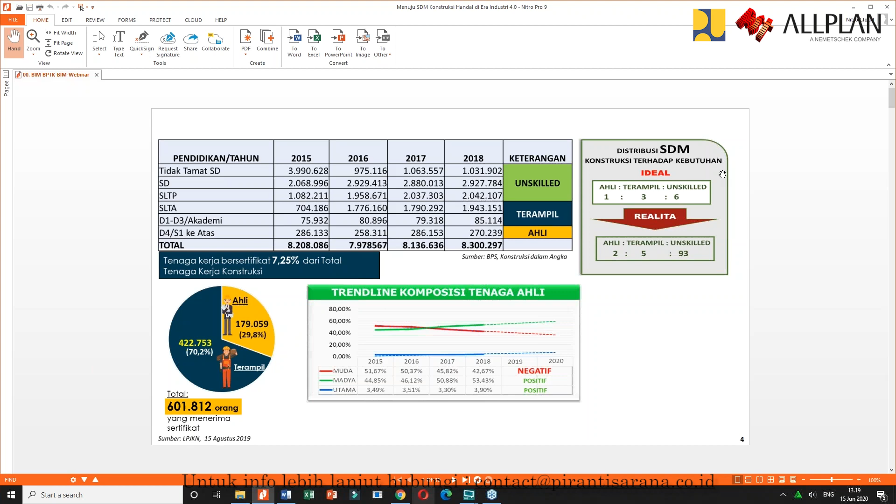Kami ucapkan terima kasih. Ini adalah pertama kali kita melakukan webinar bersama antara Balai Penerapan Teknologi Konstruksi, Direktorat Jenderal Bina Konstruksi bersama Allplan. Allplan ini adalah salah satu provider dari BIM yang berasal dari Jerman, setahu saya demikian, yang tentunya banyak sekali hal-hal yang akan kita dapatkan dalam webinar ini.

Pak Siswanto, Mr. Ulrich, dan Bapak Ibu sekalian, saya akan membawakan bahan presentasi atau pengantar tentang capacity building teknologi perancangan menggunakan BIM untuk mendukung konstruksi digital.

Mungkin ada beberapa dari Bapak Ibu yang sudah mengenal bahan ini, tapi tentunya kami harus sampaikan berkali-kali supaya kita memiliki visi yang sama terkait bagaimana teknologi informasi ini, terutama BIM, dapat diimplementasikan di Indonesia.

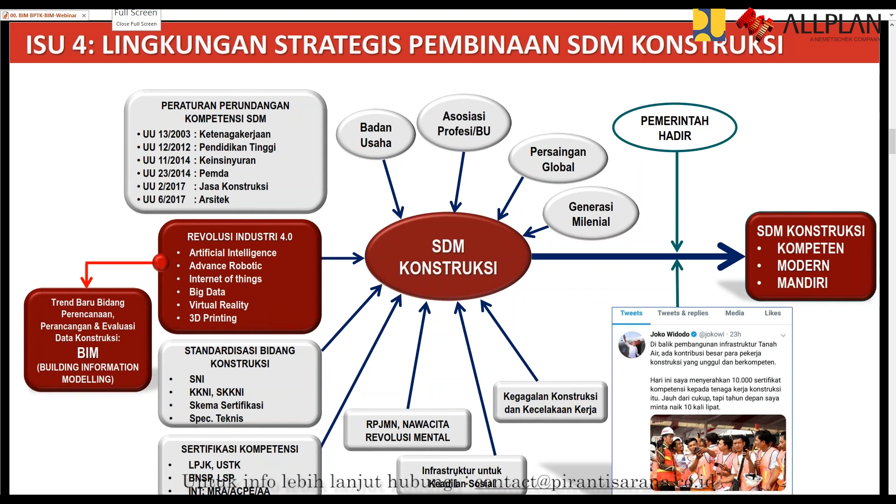Dalam menghadapi revolusi industri, ada 3 hal yang dilakukan oleh Kementerian PUPR, Direktorat Jenderal Bina Konstruksi. Pertama, kita melakukan distance learning di Bina Konstruksi untuk menjamin tenaga konstruksi memiliki pengetahuan dasar sesuai SKKNI, Standar Kompetensi Kerja Nasional Indonesia - ini adalah lower strategi. Kemudian BIM Capacity Building sebagai upper strategi, dan upper strategi lainnya adalah magang di bidang konstruksi.

Hari ini kita membahas tentang BIM. Mengapa BIM diperlukan? Ada historis di masa lalu Indonesia bahwa data-data kurang terdokumentasi dengan baik, proyek-proyek kurang terintegrasi sesama proyek, dan para tenaga ahli sering terjadi dispute. Itu menyebabkan inefisiensi dan inefektivitas. Tantangan ke depan adalah pekerjaan kompleks, visualisasi dari dokumen kerja diperlukan, dan kita memerlukan low cost dan tepat sasaran. Maka itu kita memerlukan BIM.

Kalau kita lihat definisi BIM, BIM adalah metode, bukan software. BIM merupakan metode kita melakukan integrasi data. Data-data diintegrasi, kemudian terjadi kolaborasi antar tenaga ahli dan antar data. Data-data itu hidup, tidak mati, sehingga dengan demikian kita melakukan visualisasi dengan BIM.

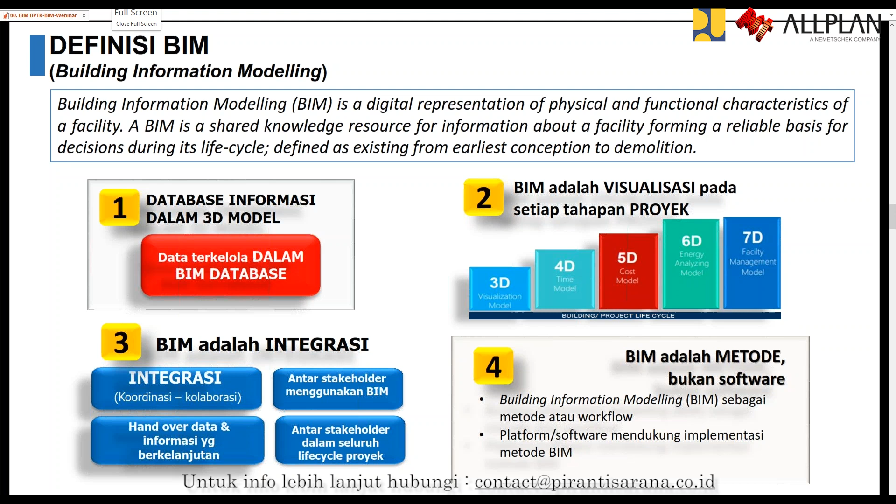Visualisasi yang kita lakukan bisa berupa 3 dimensi sampai 7 dimensi. 3 dimensi artinya panjang kali lebar kali tinggi. Dimensi keempat adalah scheduling. Dimensi kelima adalah volume atau quantity. Dimensi keenam adalah energi. Dimensi ketujuh adalah operation and maintenance.

Ini adalah arahan dari Menteri PUPR bahwa ke depan untuk melakukan terobosan dalam pembangunan diperlukan banyak hal. Ada 5 hal yang menjadi titik concern pimpinan kita, 2 di antaranya yaitu sumber daya manusia dan penerapan hasil riset dan teknologi.

Bapak Ibu, kalau kita lihat regulasi berdasarkan peraturan Menteri PUPR nomor 22 tahun 2018, di situ disebutkan bahwa pemerintah saat ini memiliki regulasi yang ketat terkait dengan bangunan gedung. Bangunan gedung untuk di atas 2 lantai dan di atas 2000 meter persegi wajib menggunakan BIM.

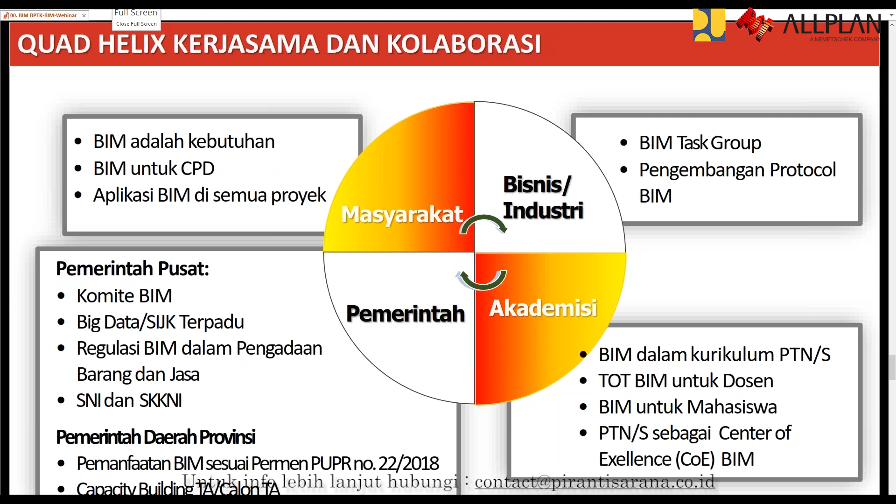Silakan, baik Pak, terima kasih Bapak Kepala Balai Penerapan Teknologi Konstruksi, Pak Cakra Negara, atas sambutan sekaligus pembukaan dan pemberian pencerahannya tentang pemimpinan BIM di Indonesia.

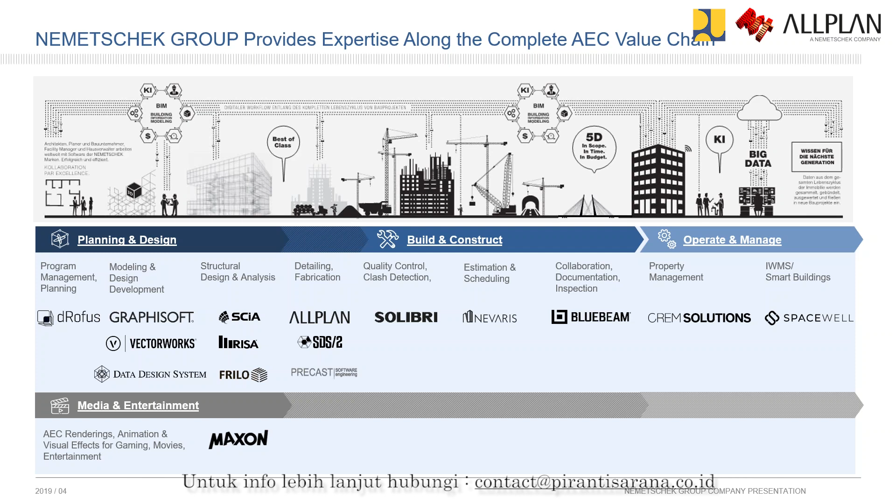Today's webinar is all about Allplan, more specifically Allplan Engineering. Let's start with some figures about Allplan itself. Headquarters of Allplan are in Munich, Germany, and we have offices in Austria, Switzerland, France, Spain, Italy, the Czech Republic, Slovakia, the UK, and the USA. Allplan employs more than 400 people in those countries.

240,000 users use Allplan on a daily basis, and we work closely together with 23 strong technology partners in 12 different countries.

Allplan comes in a few different flavors: Allplan Architecture, Allplan Engineering, Allplan Bridge, and Planbar for Precast. BIM Plus is the data hub in between that connects all those flavors with the other Nemetschek brands and even third-party software. More about BIM Plus will be in the webinar on Wednesday.

Let me shortly explain the different flavors before we go to the software itself. Allplan Architecture is a focused BIM tool for architects that comes with extensive CAD functionality. You can work in 2D and 3D simultaneously, and it creates efficient and quality construction drawings as well as high quality and reliable quantity takeoff. Allplan Architecture offers full render capabilities using the integrated Cinema 4D render engine.

Now about Allplan Engineering, the product we are speaking about today. It's a focused BIM tool for structural and civil engineers. Also here you can work in 2D and 3D simultaneously. It's a BIM tool with extensive CAD functionality capable of creating efficient and quality construction drawings, as well as high quality and reliable quantity takeoffs.

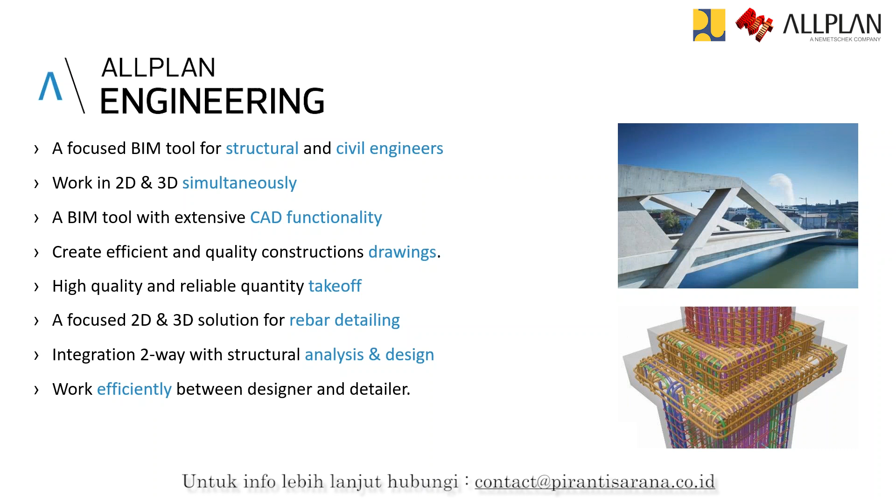The latest addition to the Allplan solution portfolio is Allplan Bridge, the professional BIM solution for bridge construction. Engineers work with a single solution from parametric model creation, with a high level of detail including pre-stressing, to integration of the construction process and structural analysis of the bridge model. Allplan Bridge offers an optimal BIM workflow for bridge construction, a common 4D parametric data model for detailing and analysis, and innovative, BIM compatible global structural analysis.

And there is BIM Plus.

Collaboration lets you visualize and analyze data from the entire project team. You can merge models from multi-disciplinary project teams. It's an open platform for all software. Collaboration is possible using the standard formats IFC and BCF, and it offers powerful API capabilities and can be used on all modern mobile devices.

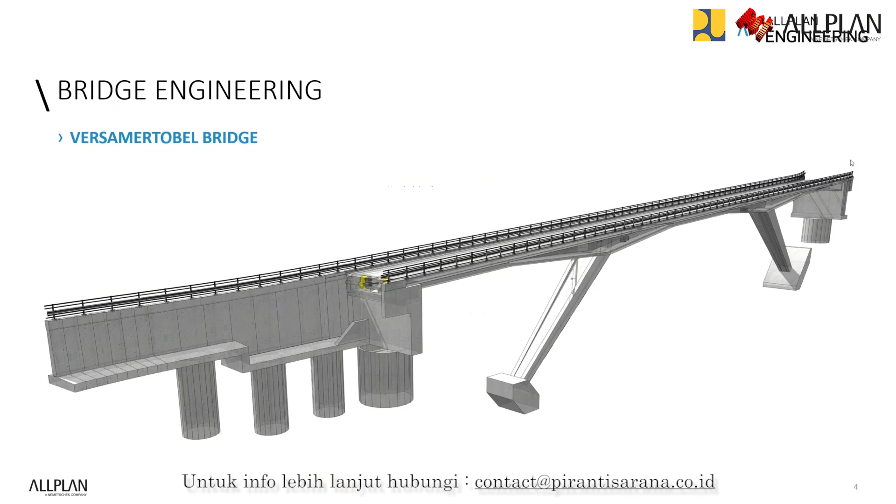First one is the Versamertobel Bridge in Switzerland. It's over a gorge in the mountains, about 150 meters long, and the span between the supports is 80 meters. We'll take a look at the 3D model to see construction phases and also what is inside this model, where you can see the rebar. And then we can also check the rebar stages. We'll also take a look at drawings to see how this can be represented, for example with the Swiss standard.

Next project is the Drydocks in Duqm in Oman. It's part of a large harbor project - these are 2 dry docks, about 400 meters long and 100 meters wide. We'll also see how a massive project like this can be managed, how these individual elements can be reinforced and managed.

Next is the Tamina Bridge, a fairly recent bridge in Switzerland also, and the construction sequence was quite special. I will show you this also in Allplan later, how you can see this or simulate this from the 3D model itself. The total length is about 450 meters, and the main span here is 260 meters. I think the gorge for the river below is also about 250 meters high. We'll take a look here to see in this project also a lot of pre-stressing tendons together with rebar detail.

Then another one is a railway bridge in Belgium. This looks like something very simple, and it's just one cross section. It's not so long, about 100 meters long, and the main span is 35 meters. But I will show what is interesting in this project, because it's a very simple structure but the detailing is very complex - you can see the tendons, and there's also something special with the supports which makes this very complex.

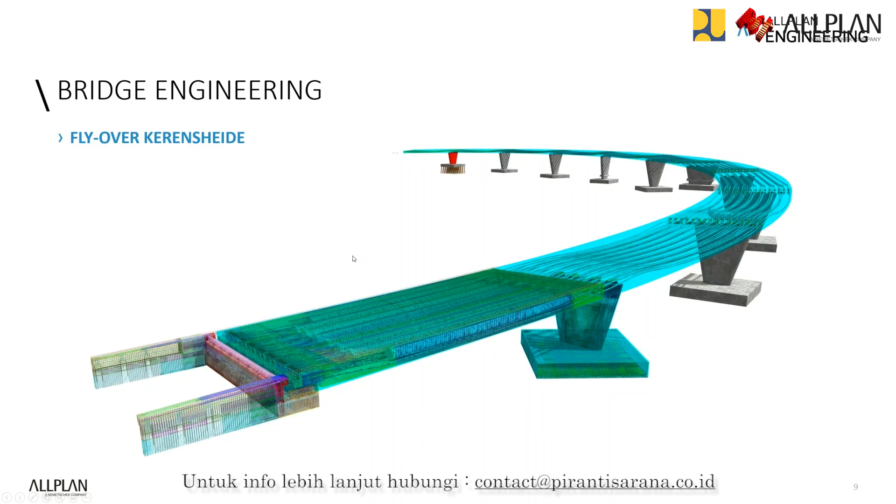Yes, so we start off with Versammeltobel Bridge in Switzerland. We can see also that in Allplan you can have your digital terrain model to see how it fits into the environment. And we can check the 3D model and then see, for example, the detail for these guardrails. We can see at the bottom that we have these tendons. So you get a good overview, or you can imagine how this project would fit in a 3D terrain, for example.

Okay, now I will also show some functionalities for Allplan. In this case, you have this curved road. The bridge itself is straight, but you have functionality to represent this in a good way.

And this is a section along any curve. So you see here actually the road axis, and I can make a section along this road axis, which can be curved. So it can be a circle, straight line, clothoid. So it can be a whole road axis.

And with this function, you can just click the axis, choose the direction that you want to look, and now the model will be cut, or a section will be created along the terrain with a depth of 0 in this case. So you see here, let's make this a little bigger.

So we see here that this terrain, there's a gray line, has been cut along this axis, and you see also all the elements. Now I can also make another section here along these lines.

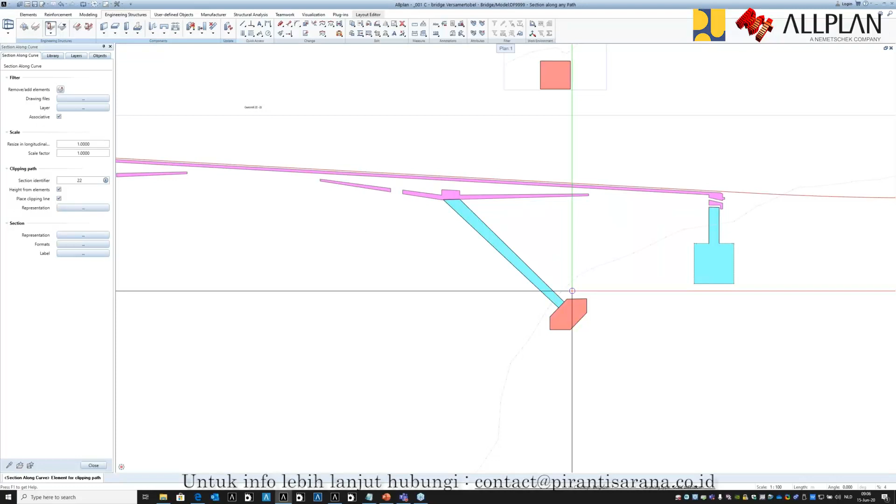Again, you can choose from which side you would like to look, from this side maybe, and then a section will be created just through this line, and this has been taken where you have this support foundation. You can see it now here with the bridge deck and also the terrain.

So it's very easy and very precise to create just a section along any curve and to see all objects, and it will be any object like a terrain, 3D lines, 3D surface. It can come also from other software. If you have a terrain there, you can just import a 3D surface, and then it will also appear on this section.

More with this section, what we can do here is use a dimension, and then you can dimension the section and just place these dimension points, and then you will see exactly the height within the section. So this is like 700 meters high. So you can just click points, and then relative to the absolute elevation, you will get these heights.

Okay, so this is about the section along a curve. Now I will go back to the 3D model, and here we will take a look at some construction stages, maybe not really stages, but to see how this model has been built up.

So you have a specific structure in Allplan where you have divided your project into different files. This will be visible in all of the projects. Sometimes I will go a little bit more into detail about this. So here we have model and rebar, and we also have the terrain.

So let's just say I would like to turn off the terrain here, and then we'll see the bridge and these height lines, for example. You can say, okay, I would like to leave them on, so you can also just turn them off here. And then we get a clean look at what our construction or 3D construction is. So turn off this one here, and then we see the actual bridge construction.

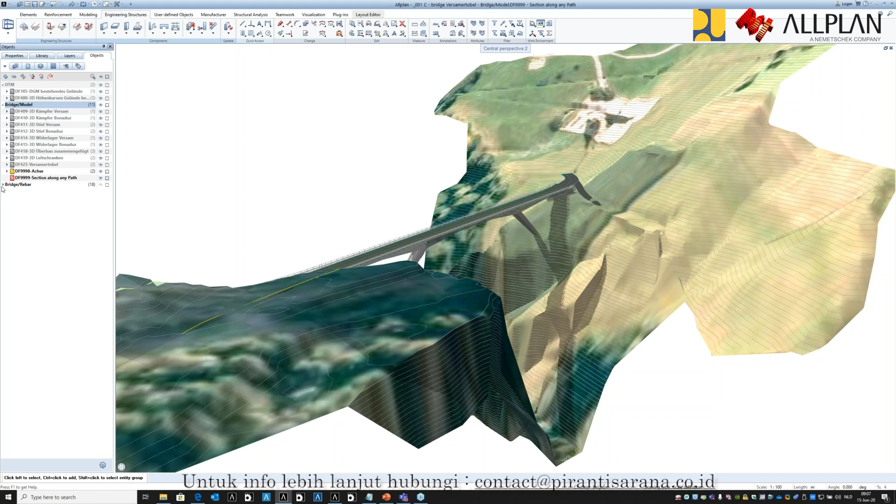So this is all 3D models generated with freeform modeling, and now I can say I would like to build it up from the start to show different phases.

So for example, we have a foundation on this side, we have the foundation on the other side, then the abutments on one side and on the other side. These can be subdivided into smaller parts - it's just here to show the different elements, and this can represent a construction stage. Then we have the main span or main deck, the guardrails, and at the end, the road covering.

Same thing that we can also do for the reinforcement, but it can be done with different detail. So we have here, for example, the rebar for abutments. And then for the abutment itself, we have the foundation for the supports, and then the support.

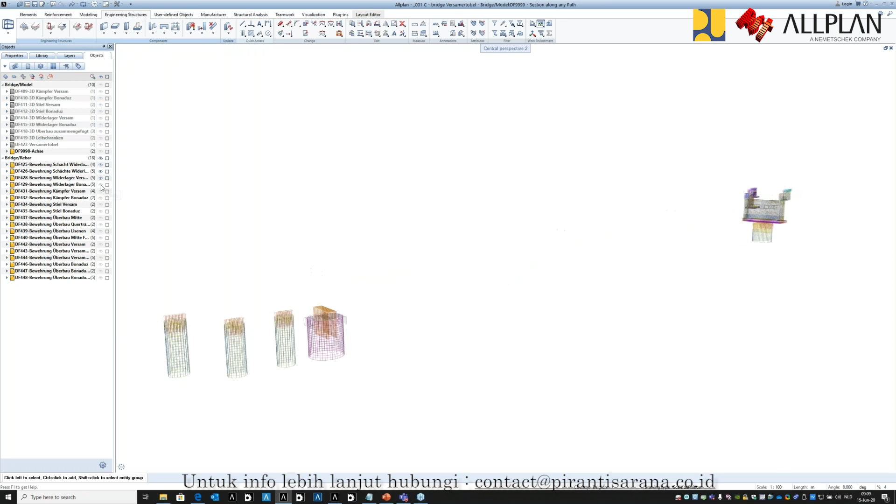So for a visualization, for example, you could choose to show this also with a 3D model. So you have this structure integrated into Allplan, where you can show how it's built up, make some visualizations of it if you want. But this is just part of how you organize your projects.

So we have then the support parts - let's take a look in detail a little bit more. These are all 3D rebar, and from 3D rebar, 2D design will be generated. I will show in the last project exactly what the relation is between 2D and 3D.

Now let's take a look at the main span, for example here, and you can just add and show different parts of each segment to see when the pour should be done or what rebar will be needed for each phase. Let's focus maybe on just one in the middle, so I'll turn off everything here and take a look at the one in the middle.

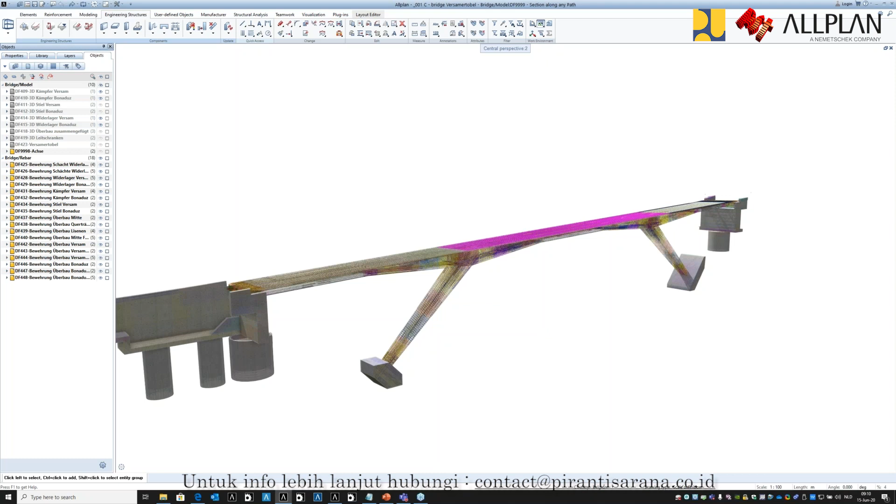So here we have a rebar, with different bar shapes and different mark numbers. In this object tree, we can go into detail about reinforcements - for example, there are 62 different bar marks, and you can say show me where bar mark 1 is. Then you activate it and see, okay, this is bar mark 1. Where is bar mark 2? Something like this - you can go through the project and check in the 3D model where each bar mark is located.

So this gives some overview about how you could organize a project - 3D model together with rebar. Now I will show you the actual plan layout that has been created from the rebar.

So here we see - I can show it in color. This is the design of the middle part that I showed. This is according to Swiss standard, so it can look a little bit different than what you're used to, and you can see details of the rebar with sections. I will also show later how this works, how you can design a bar shape and create a section, and that will be in the last part today.

Another layout is the one about the prestressing - here you can see a detail about prestressing cables. This is something that can be very well created, the tendons with Allplan Bridge, also possible with freeform modeling in Allplan.

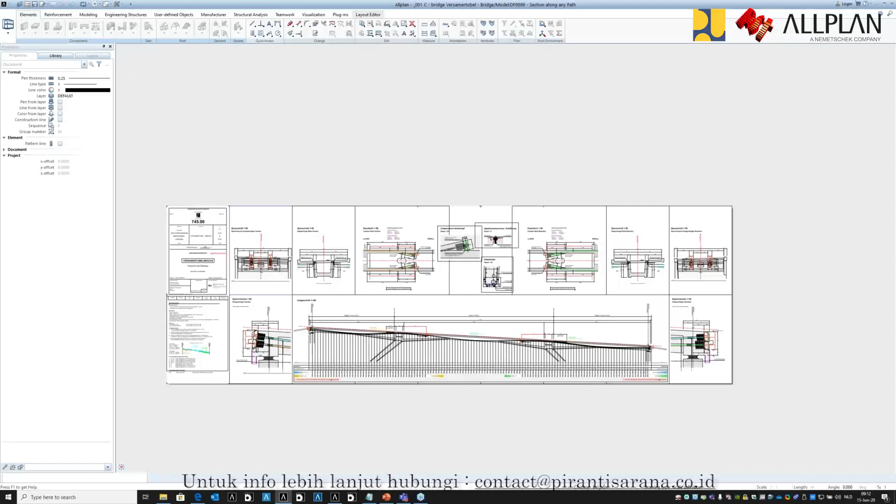In the beginning, the engineering office wanted to just create a calculation of how much reinforcement was needed, but just like a typical sketch or detail, without the need of having actual details created in 3D. But they were the contractor with a very tight construction schedule, so they said let's invest the effort in the beginning so we can actually design all these 3D elements with 3D reinforcement. So when they are poured on the construction yard, we have all the rebar already produced, and we are sure it can fit on the construction yard, and we don't lose time needing to fix problems there, certainly for each of these massive elements.

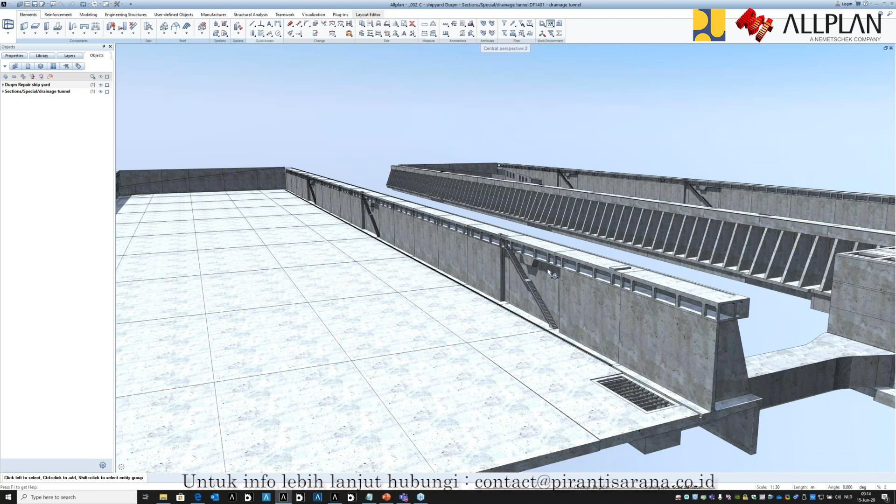Let's check a little bit deeper. If we see here, this is very heavily reinforced. And then we can take a look around, also see where it goes to the pump room, to the other side, so where it actually comes from. This is the entrance, or where the water comes from the Drydock, goes to the pump room. So this is something you also have when you have a 3D model with the reinforcement. You can check the relation and get a better understanding how these things are organized or can fit together.

There will be other elements. Let's take a look at maybe one of these, called sidewalls. So how would you structure a project like this? Because there are many elements and they need to be handled individually. And you would like to be able to work with multiple people because this is a large project. So for this, there is the building structure, and you can organize a project in the way that fits your needs.

So what we see here is an organization, and this is very flexible. You can create this how you would need it or see fit. So we have dock 1. Let's make this a little bit smaller here. So we have dock 1 on this side, and we have dock 2 on the other side.

And this is also how this is organized here. We have dock 1 and dock 2, and then we have corner walls, head walls, side walls. So let's take a look, side wall north, which is this one here. And then you have each of these elements: N1, dock 1, north wall, number 19. So each object is numbered and each object is an individual part of the project.

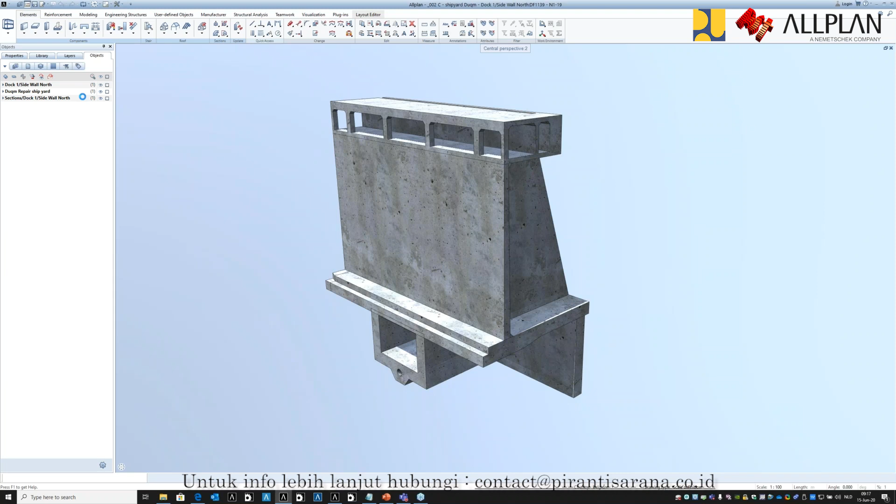In the different colors, each color can represent a diameter or a mark number. So this is up to you, or a reinforcement layer. This is the rebar model here.

So we saw the organization, we saw this drainage tunnel in detail. Let's take a look maybe at the drawing linked from, generated from this model. And this is generated, I think, according to British standard. So let's just take a look at one for the drainage tunnel, one of these sections.

So here we see each label. The label can be customized. For different standards, like we saw the Swiss standard, this is the more British standard. You can configure how these labels should look, and they're linked to the reinforcement. So we have the different sections here for the different parts of this drainage tunnel.

This was the second project. Now let's take a look at the third project, which would be the Tamina Bridge.

Tamina Bridge in Switzerland. This one was about 450 meters long, and the gorge or cliff about 250 meters high. What you will see first is the view of the full model. And you see that this looks quite strange.

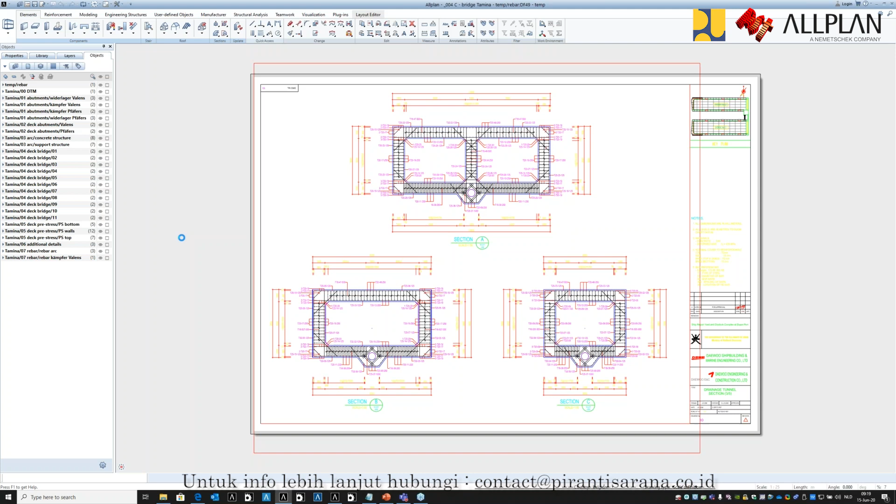This is the purpose, of course. You see that there is some steel construction with cables, but that doesn't really match the bridge. But what we see here is actually different states of the project or the model in one step.

I've activated everything here, so I see multiple disciplines, multiple stages of this project at the same time. Let's maybe focus on the finished bridge like this. So we have a DTM, we have this deep gorge for a river, about 250 meters high I think.

And the construction, on the internet there are very nice pictures about how this bridge has been constructed. Also in the case study, there is something about this. So you see this arc here, how this has been constructed. It's quite impressive because it crosses this gorge, so they need to make the formwork, and actually it's hovering over this gorge just by generating this arc segment.

So first they create a support arc, and then they put the actual bridge on top. Also here I can simulate the workflow. So let's start by turning everything off.

We have, of course, digital terrain, and then here we can see there is some cutouts already for the foundation. We'll just go through here. We have the foundation on this side, and we have the foundation on the other side, and they work on both sides simultaneously. So one group works on this side, the other on this side, and they just construct the first connection, some kind of abutment connection.

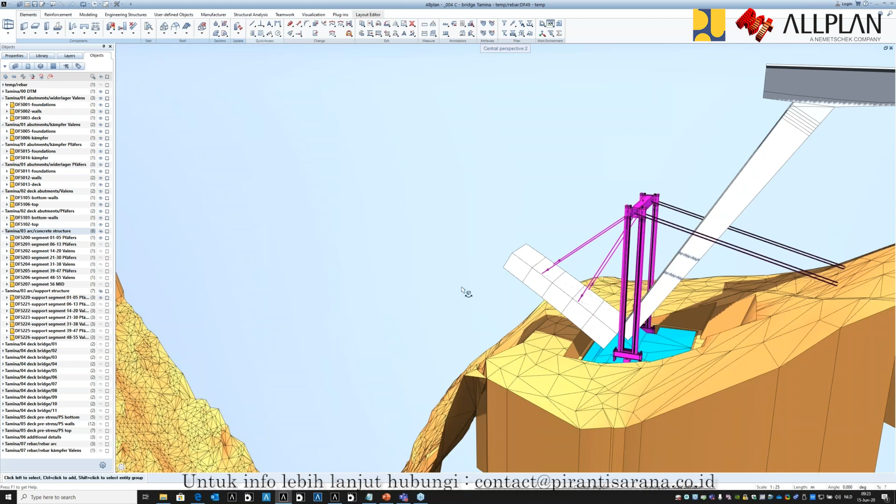So they start on this side, and now they start constructing temporary structure on the other side, and they start with these arcs here. And maybe in this arc, I can show also a little bit of the reinforcement later. So then we go to the next step, actually on this side, and then on the other side, the same thing.

And then here, the last part with the arc. On the other side, also the temporary steel structure. So they have it on two sides, and now by arranging the tension on the cables, they can move it so it can fit perfectly together.

So they still have control to move it like an inch or a little bit, so it's perfectly aligned. And then when that's done, they put the key in the middle, and this structure is completed. The support structure can support itself because it should also support the bridge on top. Then you can just say, don't show the support structure anymore. So this is the actual state of this project at this specific point.

Then we can continue with the deck, and they start in the middle. That seems like the most risk, to start on this arc in the middle without any connection there, but then they put this formwork here - a very impressive construction.

Okay, so first this part is constructed, and then the deck on top. Like this they go through different steps where they first put some temporary formwork, which is then put on top of the arc. So they work more or less in symmetry on each side, and then they have both of these supports. Then they will construct the next part here.

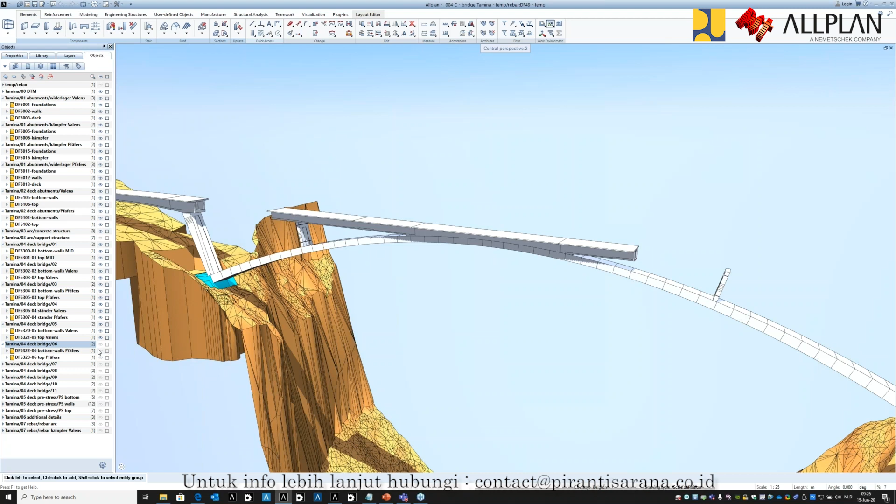The other side is not fully symmetrical because this side is a little bit longer, so it's a very detailed design. There is nothing which is actually the same. The system is the same, but the actual design is different. So there are many variations in thickness of the deck.

This would then be almost the last part there. They start from the support again, so a cantilever, and then they put the middle section. This was finished first, and now in the end, this is the last section here. So now the bridge is complete. Then you put the other elements on top, and now the bridge is complete right now. So this is the exterior.

We see the construction stages and also the parts in the 3D model. Now let's take a look at what is inside, and for this I will put the transparency on. I will turn off the details here. Let me collapse it again, so set the transparency of this surface.

So now we can see a better look in the structure. Some details are highlighted with green for the blisters for the tendons, and for example here the reinforcements - let's check here for this main part. So here you can see now clearly the segments, so check the rebar for this arc.

And we have the first part, which is then the rebars generated or coming from this main foundation, just sticking out because they wait to be connected with all these couplers. So they use a lot of couplers here for each arc - not sure how many, but I think there are more than 1,000 bars in total longitudinal for one segment.

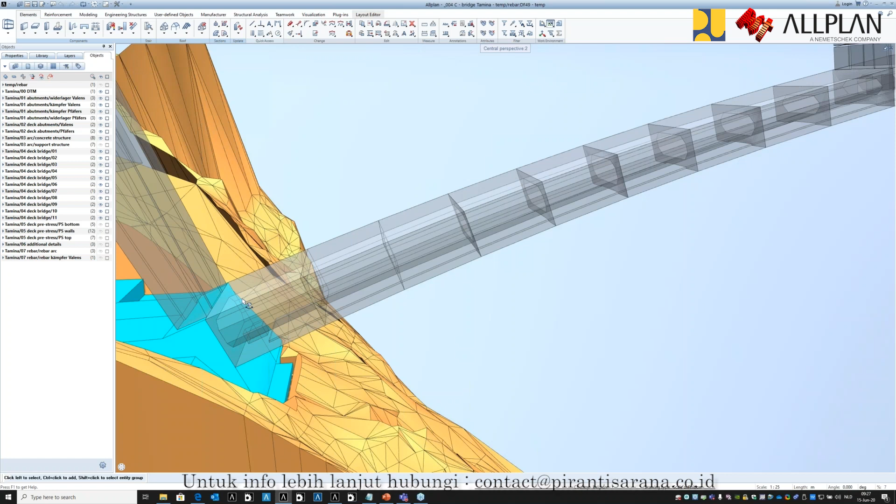And then we have the third part connected like this. So each segment is done with this kind of solution, within this 3D arc structure. So that's how they constructed segment by segment with the rebar - this is also what is seen here in this picture in the case study.

Okay, now let's put on some more reinforcement here, like this - and this is then the rebar around this connection with the support. So there is a lot of rebar in there, which is also a very complex shape. Take a look here. So this is also where the tendons will connect - tendons in the sidewall, tendons on the top and the bottom.

So for planning purposes, seeing this 3D model with the 3D rebar is very valuable to understand how it needs to be generated.

Now let's take a look at the tendons. There are a lot of tendons, I think about 120 in this deck, and we can just activate them all. So we have here this segment - you see here from the start, and then they continue here from the blister. Some end here, so this is for this structure.

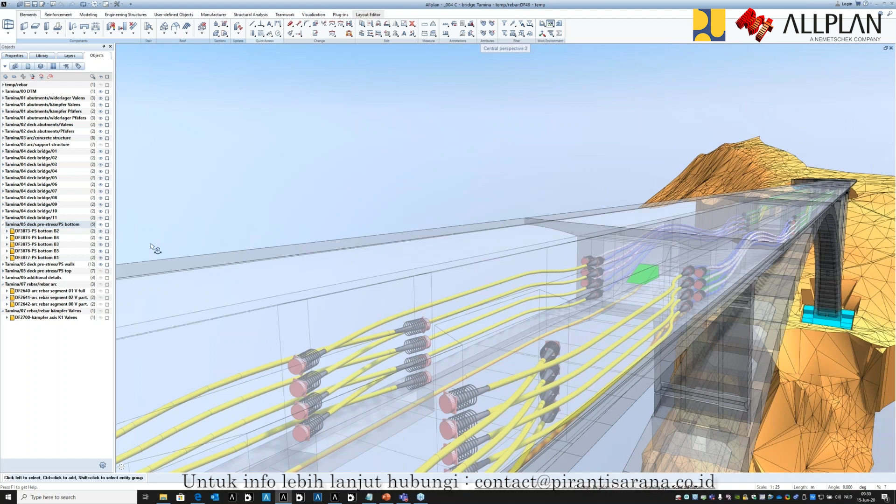This is still a parametric reinforcement. So if I would check here - still selected, it's still being analyzed as rebar. I will show you now how to create something like this.

So we have a section, and in a section you define your solution or your bar shape. Can be multiple sections - in this case, it's just one section at the beginning, and this bar shape will be used and generated by the lines that I have here. Maybe make it a little bit more dark so you can better see the lines.

So for this function, I will use specific reinforcement. It's a sweep - this is similar to 3D modeling. You can have a sweep function or a loft function. This is similar to that, meaning you have a rebar bar shape defined, and on your 3D object, I generated these lines so it's easier to understand what lines they will follow. So this element needs to follow these edges and the shape will be variable along these edges.

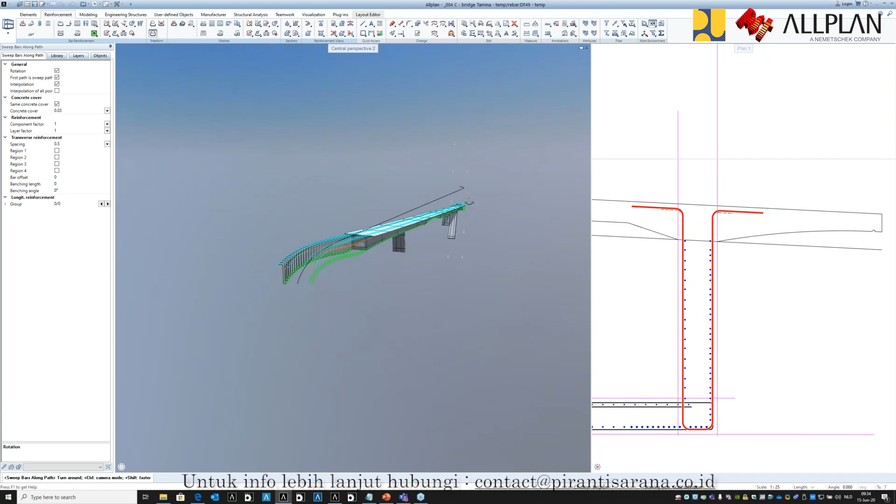Now there's one main thing that you need to do also here. You have to choose the main path, and this is the one that you see here in black, because the reinforcement should always be vertical and should be horizontally perpendicular to the axis. So there is one axis that you use to control the orientation of the bar shape - vertically, because it can be independent from the actual bridge, because the bridge goes down, but all the reinforcement should always be vertical. So you have control over this to this level of detail.

So here I will select then the edges - this is the main path that I need to select. I will make sure that we see the whole path like this.

Yes, so this is the main path. You can see it goes from the start to the end. And now I will select all the other paths. So here, if I move over the mouse, you can see then this is the edge going to that, and this would be for this point.

So I will select these edges. This is at the top, so that means these 4 edges give the orientation of 1, 2, 3, 4 points. And then at the bottom, I just need these 2. The other ones I don't really need because this one is just defined by 6 points. So now you can see the edges going all the way through the other side. So depending how many points you have in your bar shape corresponds with the number of edges you select.

So let's say here I will use every 5 meters. And now this is generated along this 400 meters length. And then you can see, and make it lighter a little bit again, so then you can see how it varies, but it also takes into account this gap, for example.

And what we have, the bridge deck, the super elevation is going, so let's see, you can see that here it goes down to this side. So on the other side, it should go down the opposite way. And here you can see also that it goes the opposite way. This is because it's defined by the edges.

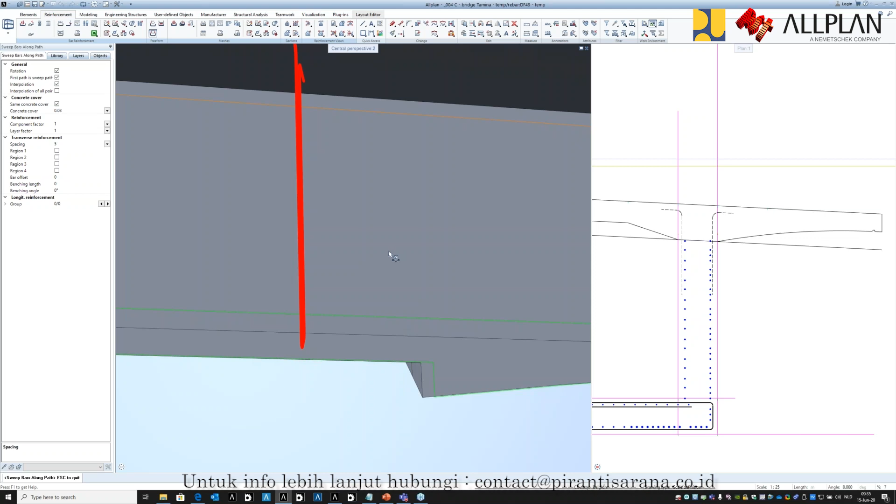So you have a bar shape that goes from left, and then if I take a section on the other side, it will go to right super elevation. Yes, so this is what can be defined by the edges. So let's say, okay, not 5 meters, this was just to show what I would like to have. It's each 0.5 meters, like 50 centimeters, a half meter, and then you can see it generates just along the full edge, full length. So this 400 meters, this variable bar shape, so it's quite performant also.

So here you can see better what happens. As soon as we hit this point, it uses this edge, and then you can see it follows nicely this curve and on the other side. So you have control over your actual 3D model with the specific shape that has been designed. You can reuse this shape to generate quickly the main reinforcements. For the detailing, you can make sections at this specific place to create a reinforcement into more detail.

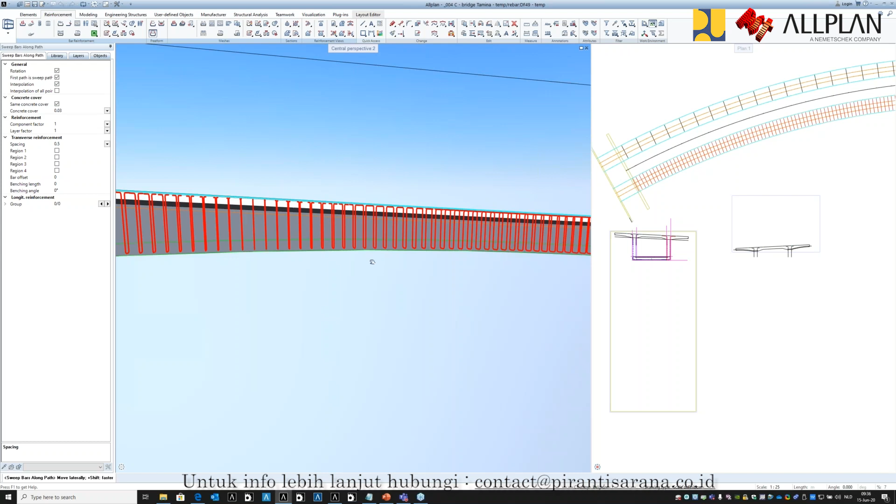Okay, I think this is what I wanted to show for this project. Let's go now to another project. There are 3 more projects that I would like to show. So let's check here. The next one would be this one, but I will show here in Allplan.

Yes, so this was the bridge. This is a railway bridge, which we said in the PowerPoint was not very interesting because it just has one section. Yeah, so this is the section, and it continues the other way. Was it about 100 meters long? So it should be almost a boring project, but the reinforcement detailing is complex.

One, because of the tendons. Yeah, so it's a railroad, so it's heavy, it will be massively reinforced also. And then you see the tendons, but also, so here, the rebar should be around the tendons, but in the side walls, okay, that's not too complex. There's not too much reinforcement, but then if we check the main deck, you can also see where there will be holes for the weight savers, like polystyrene blocks or something.

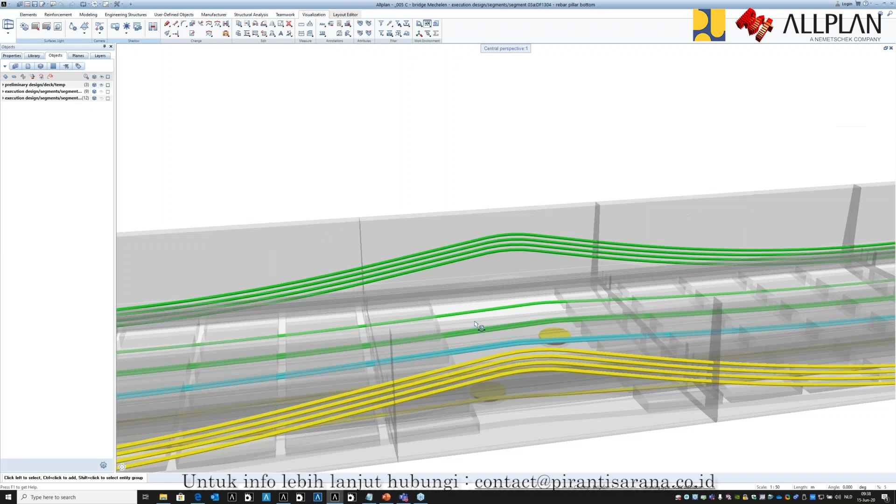So the reinforcement should be around that. But what is actually special, I'm still asking myself why they did it like this. You have in the bottom, you have supports which are diagonal. That means at each position, the height of the tendon will be different. So if we check here, this one will be higher than this one, in the middle will be higher than this one, on top of this support will be higher. So because of this, the reinforcement on top of the piers, left and right side, and this is also not symmetrical, this is a little bit wider than this one, will be very complex.

So what is the value here for 3D modeling and 3D reinforcement? It's again about how much you would like to be able to control during the design phase, let's say the construction. The engineering office, they just create a typical section, and they say, okay, we have a typical section created right here, where you have some rebar on top of the tendons and the bottom of the tendons, and then you just apply it through this whole section. So maybe there's a typical section here, which is okay because not too much variation, but then there is also one typical section.

This typical section doesn't exist anywhere in the project. The engineering office says we create a typical section, then it's up to the contractor to define where they want to create it. The contractor wants to have control over it because the tendon heights are fixed and calculated, so we cannot modify them. We need to create a reinforcement around the tendons, but there is no 2D plan of how this actually fits together. So you create a 3D model, then views and sections with a specific depth, and generate reinforcement at each slice. So where they say there is just one section, there will be 9 different sets of reinforcement or combination.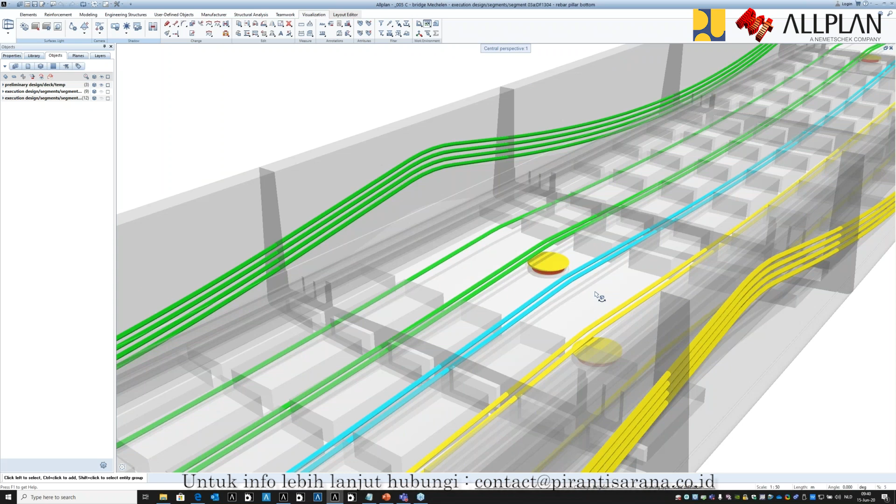Also interesting here, you can see the different segments, each one has a different length. This is one segment, another segment, and this is done by the contractor depending on the pour, since this is cast in place. This segment together with this one were the first poured. Then we had the ones at the end, and the biggest ones are in the middle. This would be the last segment because they designed it with this length depending on the rebar length.

Which one? That doesn't matter, so this one here.

If we check now, we can see the rebar with the overlap length with 3 different lengths. They chose a specific bar length, common with us is 12 or 14 meters. Depending on the rebar length available, they choose this as one bar, so there is no overlap in the segment. The overlap is just here, but they need 3 different overlap positions to get this bar length. If you have just 1 overlap, you'd need a longer overlap length, and then this bar length would not be sufficient. So they need 3 overlap lengths, staggered, so the length of each lap can be smaller. This is the solution the contractor defined, so they can make this 12 meters or 14 meters.

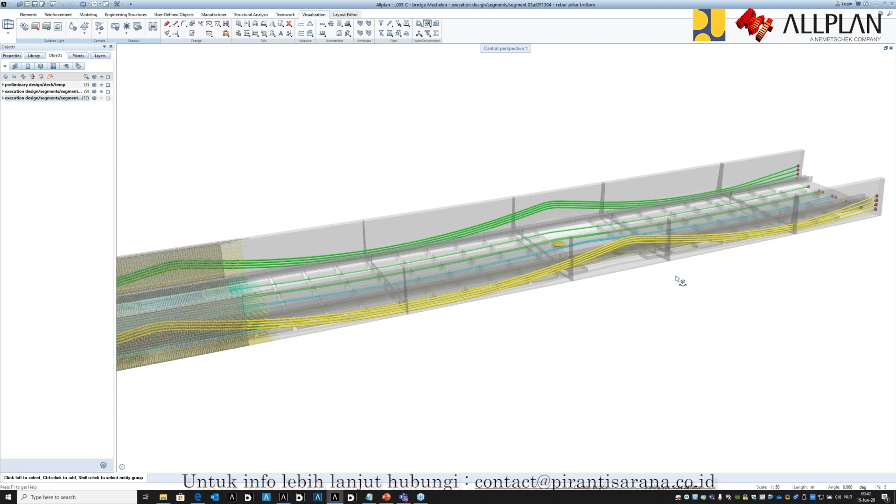Same thing from this start, we have the overlap on this side, and this would be the pour in between where the rebars connect. Because the contractor wants efficient use of rebar, they design it in these different steps. So the rebar contractor has control over the different stages. The engineering office doesn't mind how it's constructed, they just say this is the whole bridge, this should be reinforced. How this is done doesn't matter as long as it's according to specification. Then the contractor has control over this.

So we can take a look also on this side. We see the tendons there with the different connections, and we also see the rebar along the tendons. This is also quite special because the width of the wall changes, and then we have these stirrups, a little bit lighter. There are 2 U-shaped stirrups, and they have variable overlap, so the higher they go, the overlap will change so they can fit nicely in this wall.

Let's dive into one of these segments in more detail, so we can see what is actually the different layers or construction stages for the rebar, to make it clear how this should be generated. Let's see if it's better if I turn on the edges, maybe a little bit too much. So I will just focus on this one segment.

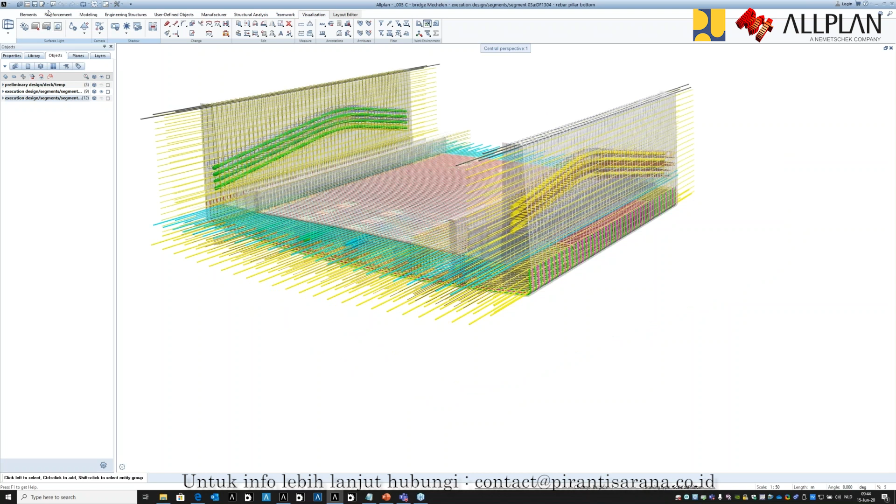Again, we have the building structure, and in the building structure these different elements have been designed. You see we have the preliminary design where we have the full deck, and then the execution design, which is split up into these different segments. Then you can just activate the segment to focus on it. So let's just open this segment.

Now we have about 11 reinforcement layers at the top. So let's focus on the solution here for the tendons, and I will go by layer in this case.

Let's turn everything off, and then we have our 3D model. We'll turn on the edges here for the 3D model. Then we have the bearings at the bottom, and the tendons on the right - we don't need the tendons at the bottom.

Here we see that these tendons, the height changes diagonally, but the contractor doesn't have any control over the height. He cannot assume that this height, because it's diagonal, could be symmetrical - that this height is the same as this one - because the tendons have been designed and this is what is fixed. So we need to have a 3D model to be able to find out exactly how the height of the tendon is organized.

Okay, now let's take a look at the layers. So we have a reinforcement layer, the first one here at the bottom, and I will turn off my 3D object. Here we see we have 2 bars, nothing special here. I will show later maybe where this comes from, and we have another one.

So this is the solution where, if the tendon is high enough from the typical section, this should be generated below it. But how many bars there will be depends on the height of the tendon. So this is, let's say, layer 1 and 2 of the reinforcement.

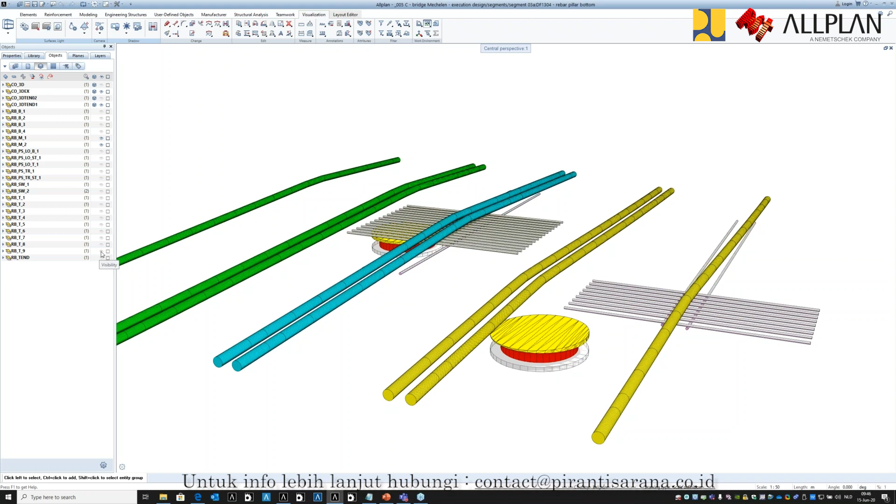So what would be a typical section here in the middle, because this looks symmetrical, it's below this one, on top of this one, below there. But this is just a small section where this exists, because here there is just one bar where it doesn't work - this one is too high.

Here you see it's covered, but this is not covered. Depending on the height, there is no way to generate this in 2D. You need to have a 3D model - you need to generate 3D reinforcement to be sure that this will fit.

Now we have another layer, and then we activate the next one. Here you see everything is covered on this side, but not in the middle, and also not this one, because for some reason this is still higher than the one over there - probably because it is inside and outside of this curve. It's slightly curved, that bridge.

And then we have the other layers on top - one more here. This is something where you see everything is covered, but also with a 3D model you can do a clash check. And now you clearly see there could be a clash right here, there could be a clash right here.

This has not been solved in this model, it's not too important also. It's just to see that when the contractor generates the rebar solution, they say okay, we have a good rebar solution, but we have a conflict here - what will we do on the construction yard? Will we just move it to the side and put an extra bar there? Will we move this?

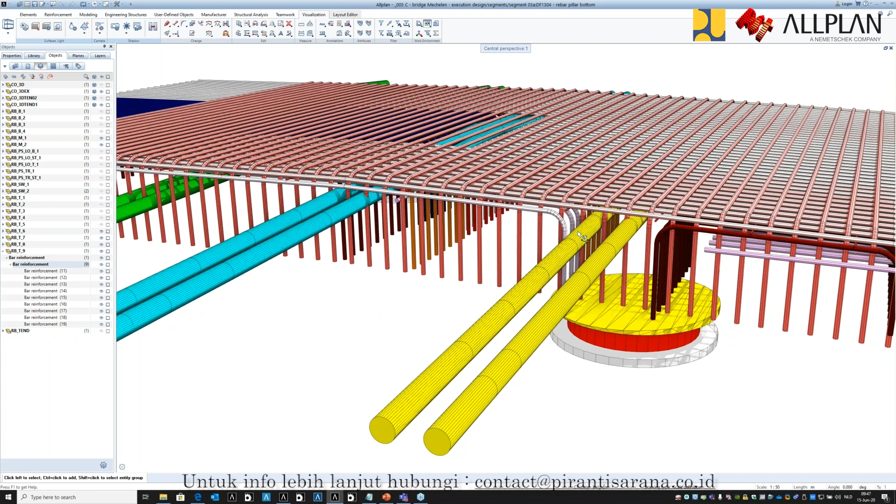So then they can check at least where the actual conflict could be with the rebar and the tendons. So let's turn off maybe the edges again. Yes, and now there will be more layers - one more covering everything now. And then there are 4 main layers on top: 1, 2, 3, 4 - because it's a railroad bridge, a lot of reinforcement.

So that means there is no way of understanding this with all the layers without the 3D model, to see where each layer would be and how the reinforcement would be generated. So we'll just turn on everything, and then you can see again, and here we can take a look in detail. You can check, okay, there we have these tendons, go a little bit to the left, to the right, so you can analyze the different layers.

But going through the different stages like this, you can clearly visualize it. You can send it to the construction yard also with an image next to the drawing - this is the first layer, this is how it looks - because if we would only check a drawing, then this would be very complex. I had this talk with one of the engineers that checked the drawings, and let's take a look at one of the drawings.

So this is the drawing. The only thing 3D about the drawing is this image. Of course, this is generated from the 3D model, but if you only have a drawing and no BIM model, no 3D reinforcement, then you have this picture, but I can also not see where the rebar is. It's just something that you can get an idea maybe.

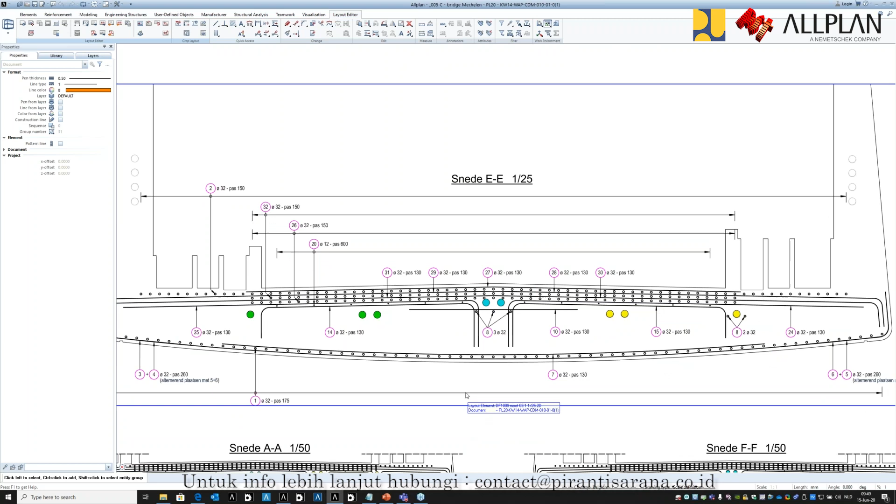And then you get the design. This is then according to Belgian standard. And then this would be, or could be, a typical section. So here you see this is quite symmetrical, but this only exists on a specific place because there are these 8 other sections which define and are slightly different.

So in this case, you see here, this is not included, but on the right-hand side, there is a bar next to it. It just all depends on the different heights, because this bar could continue over it, but here it cannot, so there needs to be a different solution. And then if you go to the other side of the diagonal, the other solution is different.

So you have 9 sections in total of different bars. So here we see section A, and this is just this 9th layer of reinforcement where you have all the different mark numbers. So you see them, this is a drawing. Looks very simple, but then if you know in 3D, this was actually quite a challenge to design it.

So this is the drawing, which is just the result from the 3D model. But you can never know the solution if you do it in 2D, because you really need the 3D element for that. So a 3D model can help very much with checking and first generating the correct rebar, so you have control over the phases and the construction. It can help with creating good drawings, because now you're sure this drawing is coming from a 3D model, so it's correct - it's not that you design something in 2D which cannot be constructed.

So this depends, of course, on what importance it has for the construction. For cost savings, this BIM work or this BIM approach is very valuable. Okay, this was it for this project.

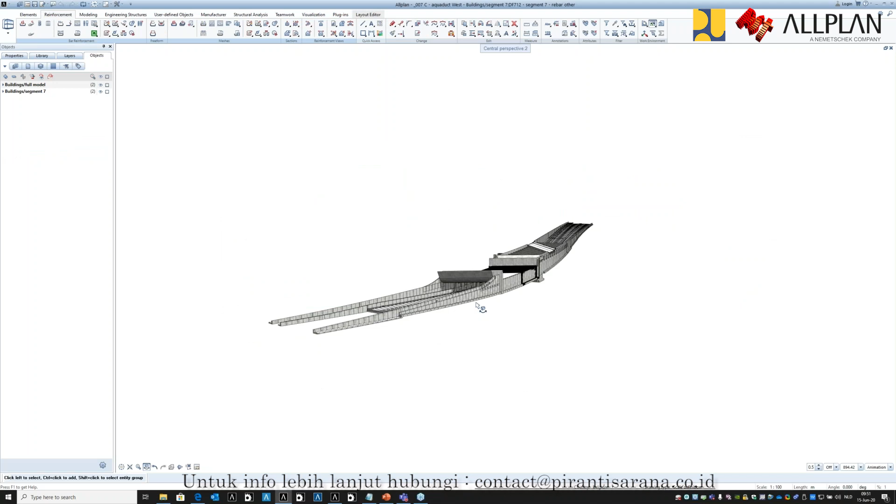Now let's go to another type of project that I mentioned here in the beginning. So this is the aqueduct - like a tunnel. Some people say it's a tunnel, but they call it an aqueduct because there is a small canal for the boats to go over. This is in the Netherlands, so they have some competition or cooperation between roads, cars, and waterways - highway and waterway - and this is a nice place where they are put together.

So if you check here, for example, you can see it's also designed where there is a road on top of it. So it's open, it's half open, and then there is this part section which is actually a tunnel. So if you check here, we could go to the center or take a look here in the middle, for example. We'll take a good position. So here we see it rotating back, so you can check here, take a look at the different sides.

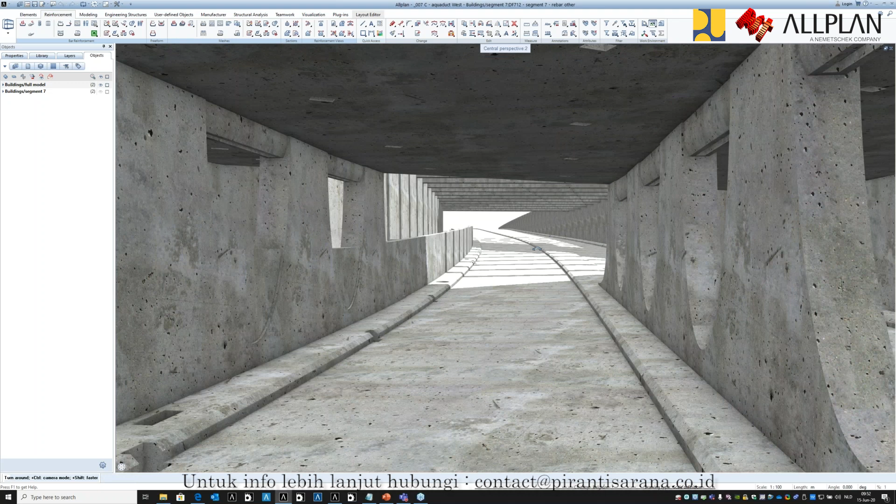And now we'll activate also the rebar in here. So this full model I would like to turn off, so the segment - now you see we are here in this segment. And then I can turn on the rebar, and then we have here a rebar at the floor, all rebar. So here we can see the rebar solution with these walls and these curved openings. So this was the construction of the rebar for one of the parts for the aqueduct or the canal.

So you have a full 3D model, and then you have your rebar model. They exist next to each other, and you can zoom in or focus on the part you would like to see. Okay, now we come to the last reference project.

This is the one in the Netherlands, a flyover, a highway connection about 600 meters long. And what is special about this project is that from the beginning, it was a BIM pilot project in the Netherlands. So they thought before the project started about a good way to be able to generate or to manage the project with as much BIM as possible.

And there were some interesting discussions in the beginning, because some people said, okay, this 3D model and BIM is all nice, but we first need to make sure that we get the correct 2D representation.

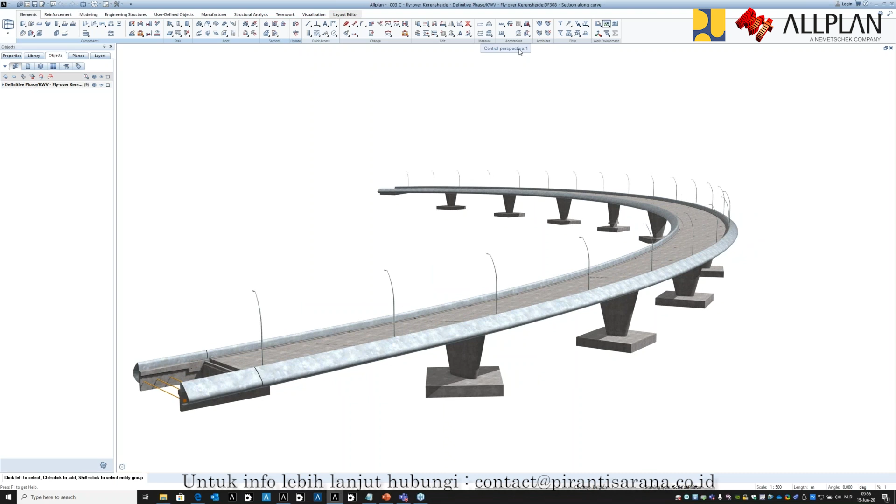First, we have this deck again, 600 meters long with all the spans. They need to have a good drawing also, so here, let's say the same thing with the section along curve. And here, this is what has been designed in the past with 2D functionality.

These sections are still generated in 3D, but the overall profile is then done in 2D. This takes maybe half a day to generate, to make sure that all the heights and everything is correct. If you use this section along curve again, just choose the axis.

This was special because it's not the center axis that was taken, it's the axis on the side, so it's also a spiral or clothoid with the circle, a composite element. And it's not looking from the inside as you'd expect, it's looking from the outside, so you can just quickly choose the direction.

And here, if I position this, it corresponds with their design, so that means what they did at the time was right. It also means this function works well, and then we can dimension the section, just click again, put this dimension or label here, and you can see it corresponds with the height of the section that we have there. You can click different points and always get the height from the 3D model.

So this is quick to generate and also to check and label, and it's consistent and correct, because this section along a curve is cut exactly along the axis you've defined, and the length is a developed length, so it's very precise. It shows each object cut along the axis, and then you get a developed view here.

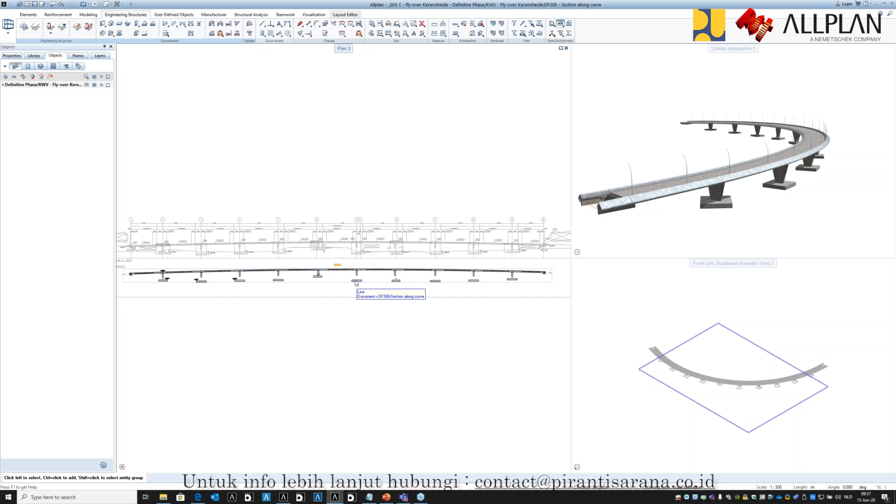Okay, so let's go now to rebar design, and we will take a look at one of the piers. So we'll go to the building structure again, like this. Maybe turn on something about the construction. Let's put on the different files of the structure. And then the rebar template.

So we'll see again in the 3D model how the rebar is located, and some different stages. Then we will focus really on one pier, and go a bit more into what the relation is between the 3D model and 2D representation in a view and a section.

Okay, I need to do something here also. After that, I will show a live demo part where I will be creating some rebar here. Maybe I turned on too many different things, so it's still loading. Okay, let me turn off focus here.

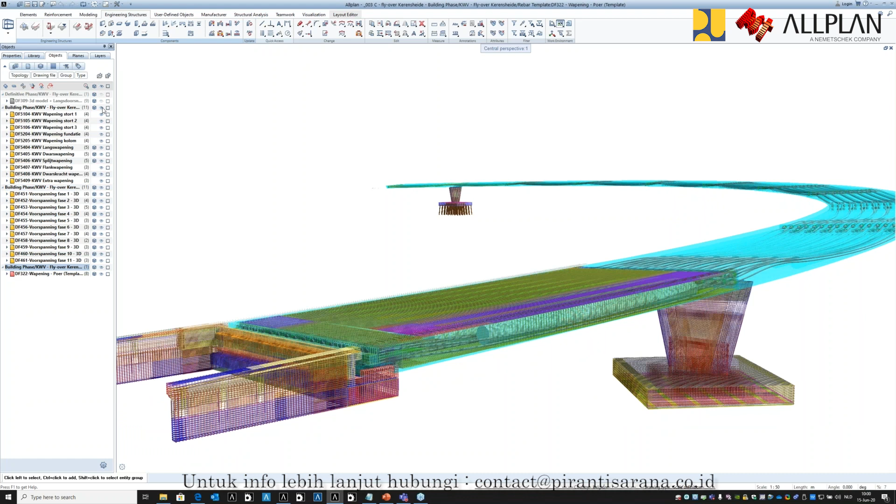So about construction again, this is for each segment of the deck. Like this, you can see the different stages. You can also see these polystyrene blocks, for example, and it's constructed not from one side to the other. It starts here in the middle somewhere and goes to this side first, then to the other side. So again, this is something we can visualize here.

I'll focus maybe on this segment 4, where it's connected with the abutment, and we can see here the different layers of the reinforcement. This is pour number 1, where they start from the abutment, pour number 2, pour number 3, abutment, and then, oh, this is for the column.

I will zoom in on that later. For the deck we also have the longitudinal rebar, see here, and then the transversal reinforcement, and a lot of other reinforcement coming together here for the tendons.

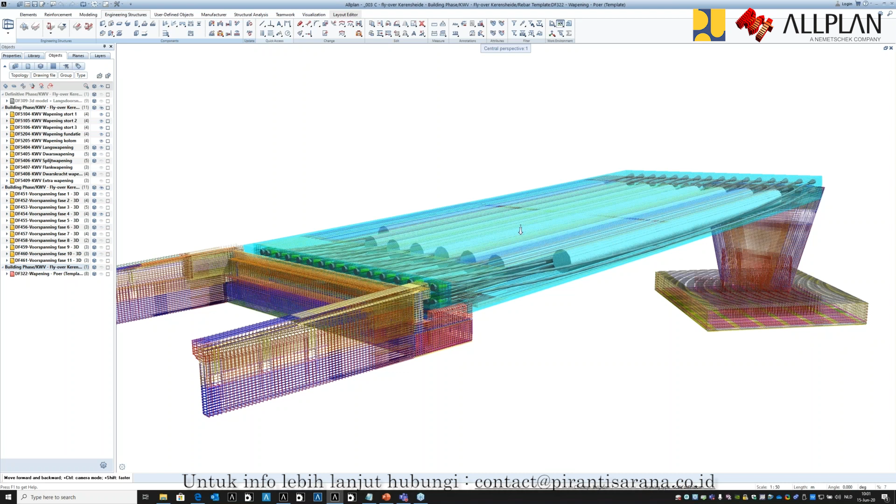Maybe I can turn off these different sets here, like this. So now it's really full of reinforcement, where we have the tendon heads, and to the side also, yes. So we can also see here the different parts.

Okay, let's focus on just this one column, and here I will show the relation between the rebar and the drawing, or how you actually create or manipulate a reinforcement. So here we have one pier with the foundation and the foundation piles.

What we see here is a 3D model with 3D rebar. So we can check again the bar reinforcement, for example. You see you have 200 different mark numbers.

And here, if I move over, you can see where all these bar marks are located. So it's again object tree, or the tree down to the object level, to mark number. Now let's take a look at where or how this is actually created.

I will put this to the right, to the left, sorry. So we have the 3D model here, isometrical view. You can have multiple visibility views next to each other. Maybe I don't need this one here.

And then what we see here, this is a drawing, just like what we've seen in the layout editor. So this is the preparation of the drawing, but we talk about 3D rebar, and this is a drawing of 2D rebar, but it's still very much the same. So your model is a reference.

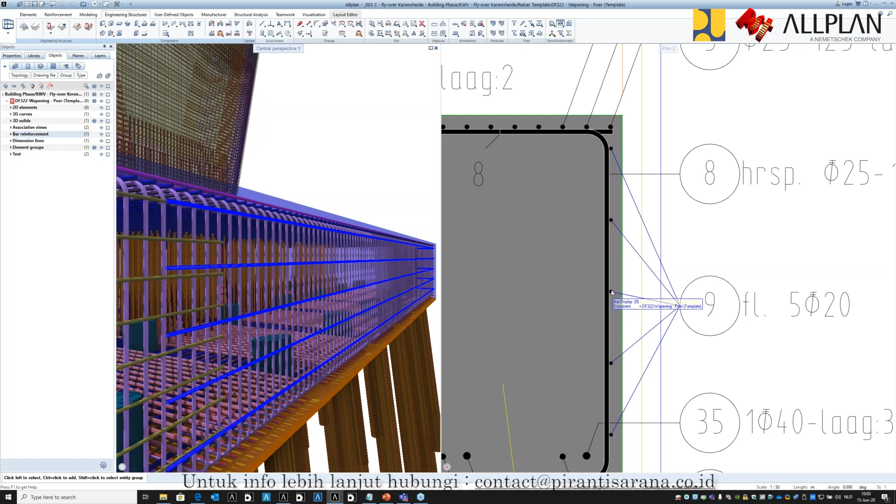If I move over, you can also see with the tooltip bar number 9, and it will be, of course, bar number 9 right here. Bar number 9, you can select it here also, and we see we have 5 times diameter 20. Also in another section, you see this is also being selected, and this is 5 bars here.

Number 9 and 5 bars. So if I would change one, you can do this with direct input or through the properties. Let's say I would like to have 7. Then I can modify them here. Now you see in the 3D model there are 7 bars. The label has been changed to 7, and in the other section the label has also been changed to 7. So I will go back - one modification, 5, change it, and now we will have 7 bars.

3D model and 2D is the same thing. 2D is just a representation of what you would like to put on a drawing file. You can create all the 3D reinforcements with all the sections that you need. Then the sections can be used to put on drawing, but you can create multiple sections afterwards just to create your plans. So it works both ways - you generate reinforcement in your 3D model and you can modify it. Maybe I can show this right here.

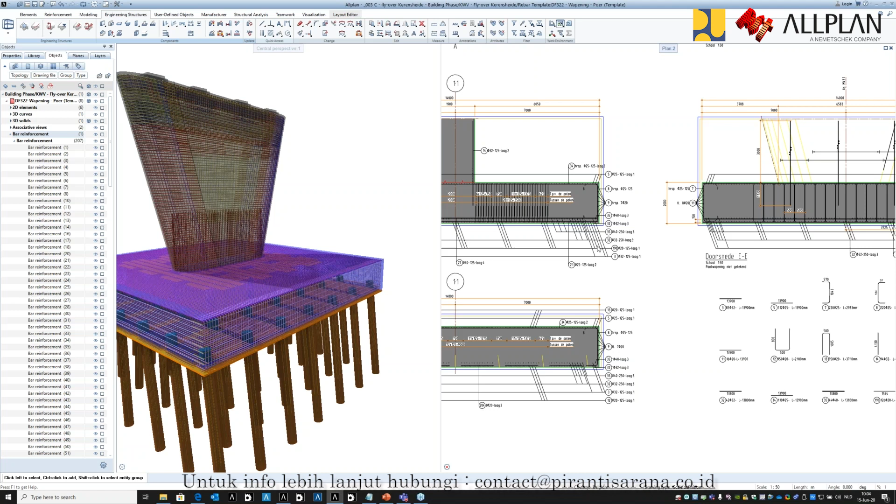Not a good example, but just so you can see how this would work. I can say I would create in this section a bar shape. You just choose bar shape and I will place it, design it there in the section from there to there, something like this. Nothing special. You can still say okay, I would like to have this edge 1 meter and this end segment also 1 meter. And then you can do the placement. Depending on the settings, a rebar will be generated.

You can make it generate automatically. Then you see here along the length where it can be applied, you generate in the 3D model, just with this section, a rebar. So it's located from there to there. It detects the geometry automatically. You can also say I would like to have it in a specific position. So it works both ways.

3D model, you can generate sections from it, from a specific place to give this detail. Like in the last example, there were 9 sections needed. At the same time, you can create the sections to generate reinforcement in the 3D model. So this shows this relation - 2D drawings, 3D reinforcement, actually the same. You can use both of them to get 2 different representations, but the reference is a 3D model. The BIM model is the reference, and you can create drawings, but the quantities and everything, the labels will show what is in and will come from the 3D model.

So if you get rebar quantities, doesn't matter how many sections you have - like this bar, 9, 7, here also 7 - I will not get 14 bars in a report. This will be just 7 because it's counted from the 3D model.

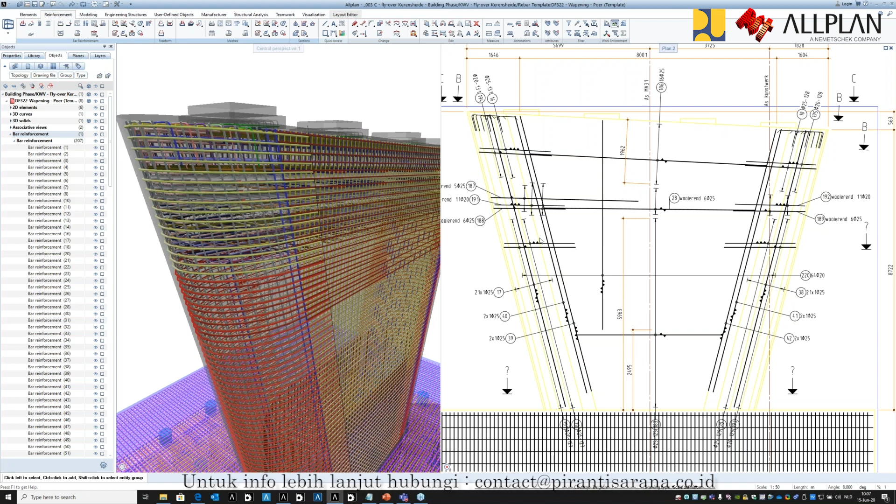Now, talking in the beginning about design - what is special about this one is the design for the pier. The rebar contractor and the main contractor engineering office sat together at an early stage. So while the design, or let's say the drawings, have been created by an engineer, the design of the rebar has been created by both of them together, because the engineer needs to check if this rebar design would work. Then the rebar contractor can say okay, I would like to have this as not one bar going through the bottom of the pier, or the foundation, to the top, but I would like to split it, because that would be a very efficient workflow. Then the engineer, of course, needs to check if it would still be structurally okay.

So let's come to the last part here, which actually shows what this project was about. We've seen the 3D model, we've seen the design or the 2D representation, but about the actual design, I have some images here from the project.

Let's compare with the segment we saw in the beginning — this is done on the construction yard with the polystyrene blocks and the tendon heads or anchor heads. But this is what it's really about.

Because of the 3D model, the rebar contractor could design this in their workshop. You see these bars are actually not elliptical — they're just bent with a couple of very shallow angles, not a sharp angle. They could design the whole pier in their workshop and fit it together to do an assembly in a controlled environment, not influenced by the weather.

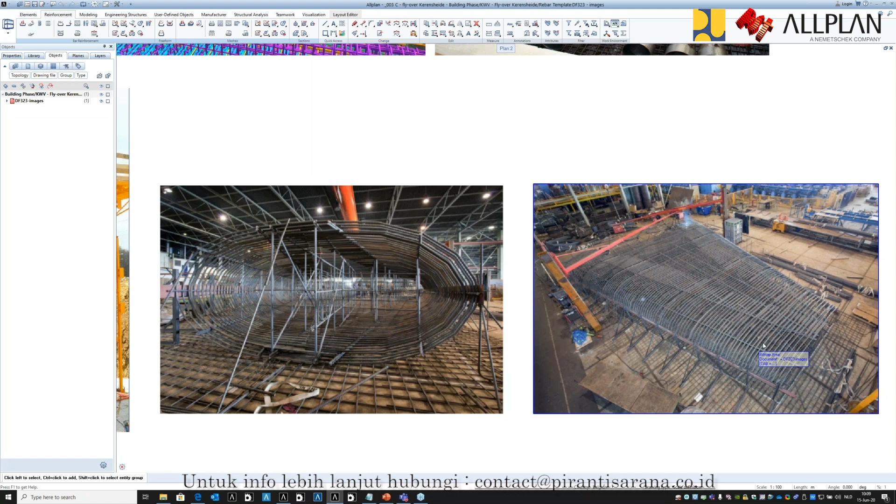Then they could ship the cages — they're actually located next to a river. The first stage is to put them on a river, then put them on trucks, so they design the cages so they can be transported. They can do all this in their workshop and deliver on site as requested, so they don't need tons of rebar on site for people to work on the construction site to put the rebar together. They just create these piers and ship them to the construction yard when the concrete needs to be poured.

This is what we see in this picture here — you can see these cages being slid in. There is one in the bottom, so this would be maybe 3 cages for this pier.

They use formwork, which is very expensive and not so easy to get, so they can reuse the formwork for the next pier. If you would need to construct the rebar inside the formwork on site, it would take maybe 15 days to a month with a couple of people. But now they can just slide in these cages and pour the concrete in just a couple of days, then move on much quicker to the next pier, because they just have to get these shipped from the workshop.

So, because they have a 3D model, they have full control over the rebar. They put the cage together there, and then they're sure it fits on the construction yard.

For them, this exercise was really to efficiently design, but also to efficiently construct. Efficiently means time-wise, so they gained a lot of time. I think this project was opened 3 months ahead of schedule, which doesn't happen too much for an infrastructure project — so it was a success in that regard.

Also for the costs of mistakes and things that needed to be solved, they had full control over it. They created it in the construction yard very efficiently, with not much loss because of faults or mistakes on the construction site. So this was very interesting.

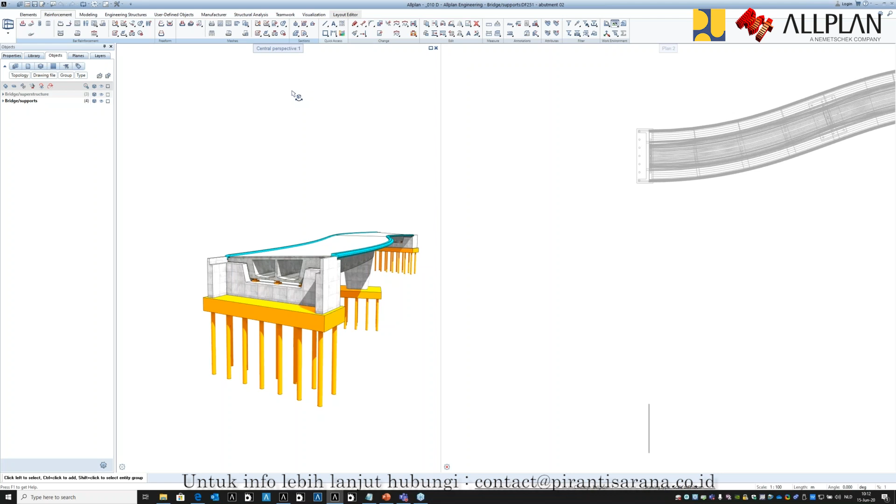Okay, so this is an example project, and you see here a double curved deck, and you see also that this kind of abutment needs to be created from this shape of the deck end. I would like to show now some hands-on modeling, just some steps, so you can see how this works.

There are 2 ways to do this modeling: you can do freeform modeling, but you can also do parametric modeling based on Python, for example. So I will show this part here.

Okay, let's go to a preview here. So we have our view on the right-hand side as a reference, and I will turn off some elements so we can focus on my section.

This is the bridge section, the main section at the beginning, and you see here it's now flat. A part has been taken there. If you look inside the bridge, you see where the deck ends. This is the main section of the deck, and we need to create something for the abutment, which is slightly different. In this case, there's a part where you connect the deck, so this needs to be a little bit thicker.

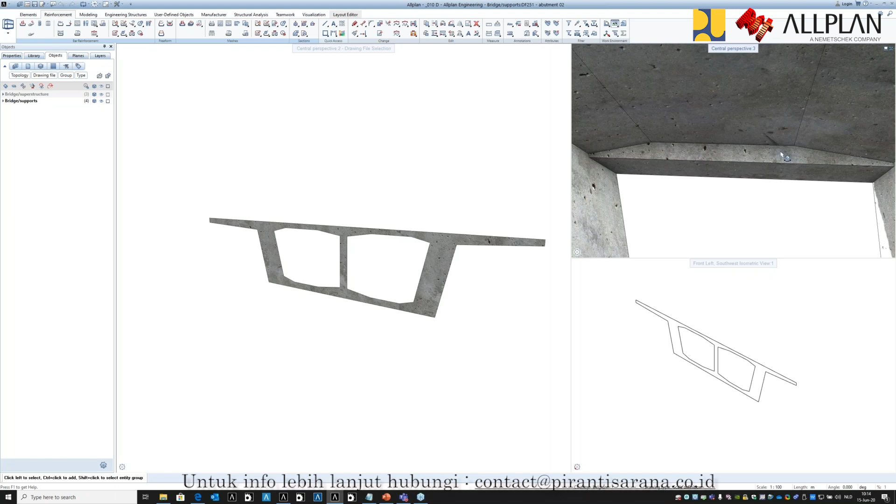This is just an example of how we can generate something like this and model it. I will generate this last section of the deck that can be added to the deck here, using some freeform 3D modeling functions.

I will mostly use functions like extrude and shell to make objects a little bit bigger, some drag functions. This would be extrude, for example. I would like to make this a little bit thicker, so like this, then you select the edge, select the thickness. So this is now 1 meter thick.

Now I need to make this, like we see here on the right and left, a little bit higher and thicker. So I will use the shell function now, and change the color so we can see what we're doing. I will generate from this bottom element, choosing this edge or surface and this surface, and make something which is 2 meters down.

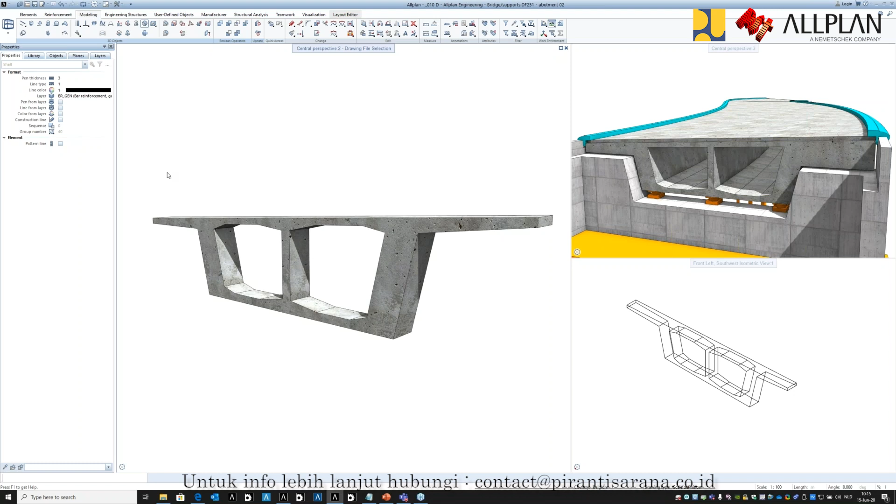So what does the shell do? It takes this object and, along the edges or the other surfaces, generates an additional object. So this is now something a little bit bigger.

Now this is not horizontal, so we'll need to cut it horizontally. For this, we use a slice function. Select the object - this is still one object because I generated it at the same time. I would like to slice maybe through 3 points.

You can choose a surface also, but from this point it should be 1.5 meters down. So I say minus 1.5, for example, and you can see the crosshair, the red dot - this is the point. Then you can use the track lines to create a 3D surface, and you see here this is now cut. You can delete it, so we have this part on the left and the right.

Now I can union. Union means you make one object again - the first one you click will be the property, so if this already has attributes and textures, that will also be transferred to the other one. So now I have one object, one full 3D object.

So this is done with some main functions like extrude, shell, slice, union - typical Boolean operations. You can also generate this object using those.

Let's go a little bit further here. Use again the shell function, now from the top. From this object, I will use the top surface and again along these edges, but here I would like to go down 0.5 meters.

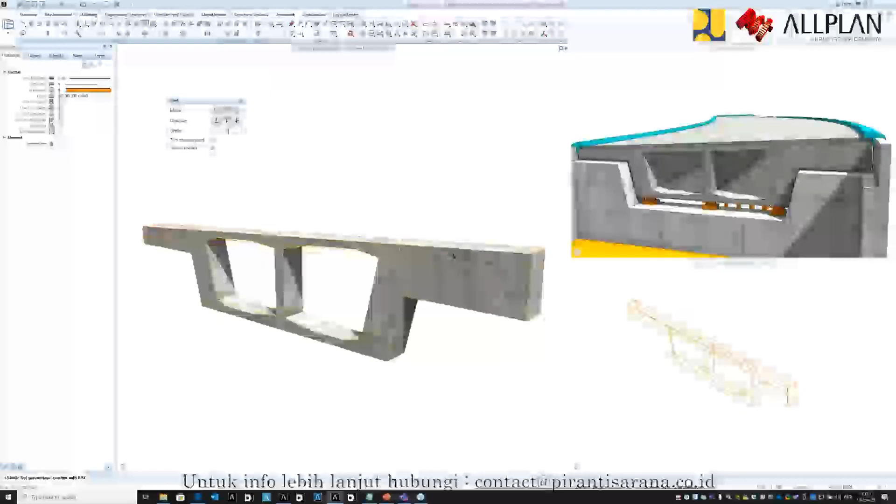Yes, so this is done - let's say it's almost finished. We just need to have this cut out at the top for the connection with the other deck. So we'll use the extrude, for example, from this surface, and you can extrude a whole surface, or choose on which surface you'd like to extrude.

So I would like to extrude on this point from this one here, and then go down, minus 0.2, so 20 centimeters, to this point also minus 0.2, and then here. So this now extrudes, and you can see green will be adding to it, and this also here. Then the depth is 0.2 on the other direction, minus 0.2, then you can see it red, and now this will be cut out. So this segment is now finished with a couple of functions.

Now I would like to generate this abutment. What you see here, there is a gap, but the gap is different. This would be 10 centimeters, and this is maybe 50 centimeters. So I would like to take this shape to make the cutout for the abutment.

So when you do 3D modeling, there are many different possibilities, many different workflows. It doesn't matter how you approach it. You can do this with different functions also. I'll just show one possibility here. You could also first design this one and then cut out, but I will just start from the same object that I used before, so just from the surface.

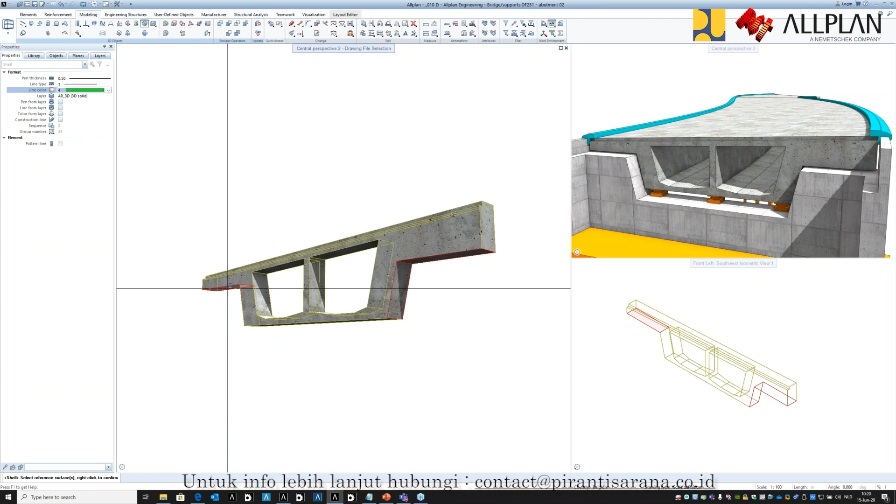So I will use the shell again and make the color a little bit different, not the line color. And then select the object, and here I would use a shell for multiple surfaces. Let's take a look on this side, because I would like to do an offset of all the surfaces at the same time, with an offset of 0.1. So this is then the gap that is generated right now.

You see here this is the 10 centimeters, but at the bottom I needed to have more. So I can use the shell again. Click element, the green one now, select the surface you would like to have, and now I can say this should be 0.4. Because of the options you can set here, you can choose it should be perpendicular to the surface, or it should follow the edges. So here, follow the edges is right, and then I have this part, the cutout of the abutment.

So let's just union these two. Okay, so now I have my main end of the bridge, and I have this cutout. So now I can start with the abutment.

So let's say this first part here, I will create a box. I'll use orange again, and now I will generate it also with some offset. So instead of clicking the right points, I will use relative points, relative from this one that I have here, you can see here also. So let's say from this point, I will use a half-meter offset, for example. So you see this is in relation or relative to a specific point in your 3D model.

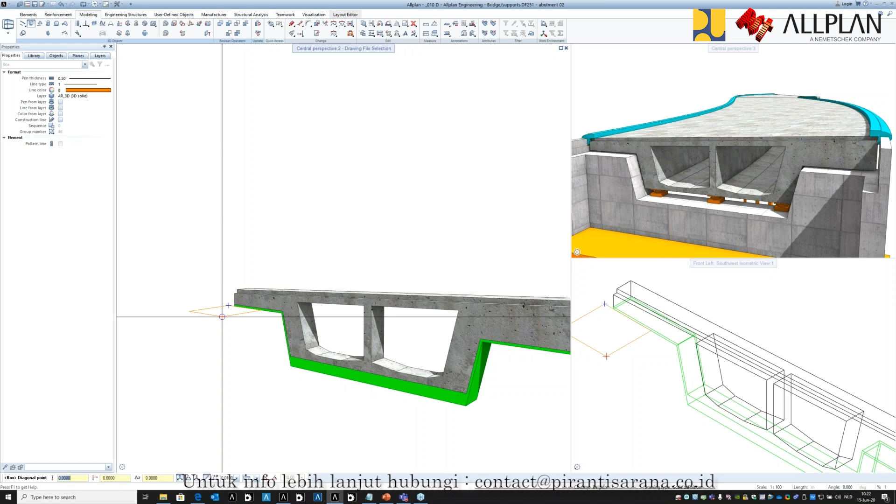It can be like a smart symbol, a block, so many different ways to do this. Then you can get all the attributes from it. They can even be generated from Allplan Bridge, for example, at the right position.

So here I will go a little bit further with modeling this abutment, just 2 or 3 more steps. First, I will make this again a little bit thicker, so let's say 1 meter here, 1 meter, like that. And now here I would like to create a block on top.

So also we can do this with extrude, but then with a rectangle maybe, or a polygon like this. Just choose the surface, and then you can say, okay, I would like to put it there, there, and in this direction should be 0.4, something like this. And then the height should be as high as the other object.

So then you can use the other object's relation to model it, and I can do the same thing on this side. Use the extrude function, or just put a block on top, doesn't matter too much, on this surface. And then from this point to this point, you put your mouse for the reference, give a direction, enter a value, and click another point for the height. Okay, so here almost finished. It should make this a little bit longer.

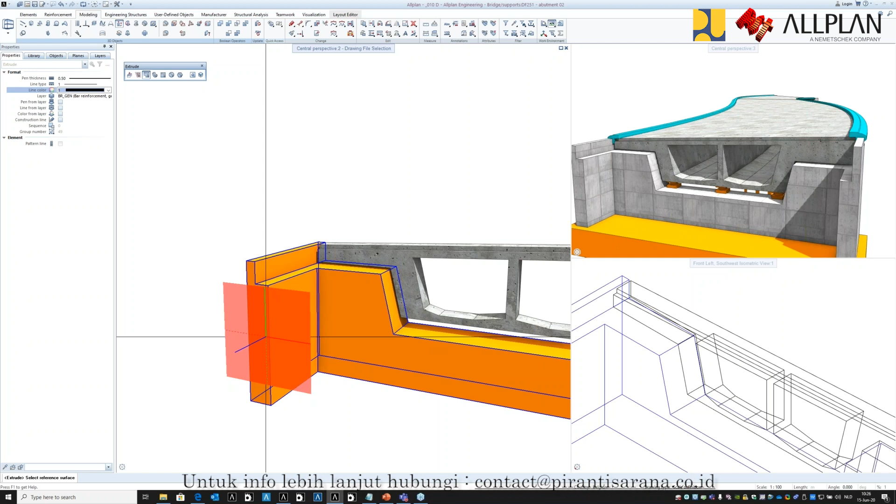Now we'll create just one box below it for the main foundation plate, let's say. And here I will use box, and then choose again these points. So minus 0.5 for the reference, and then 0.5 to the other side here, 0.5, minus 0.5, and then you can set the height, like 2 meters, minus 2, for example. So here now I have these elements.

For the representation, you can see texture can be automatically assigned depending on the color, but I can also say, okay, this object here, I would like to assign it a different surface. So maybe from this project, I would like to use some other type of concrete, maybe this one, and then the object will be generated with this surface. So different possibilities also for visualization.

So now we've seen here, this is freeform modeling. Now I will put next to it a parametrical abutment with Python. Python is a programming language that you can use by yourself to generate objects. So this is an open API. If you're experienced with Python, you can create these parametrical objects to be used in Allplan. And here I will just take a standard one.

A standard one from the default library, engineering, and here there is, for example, abutment. I can place it maybe at the same point as this one at the bottom here. You can see with the trackline references, and I would like to change it with an angle of 90 degrees, so it represents more or less the same point. So I place it here.

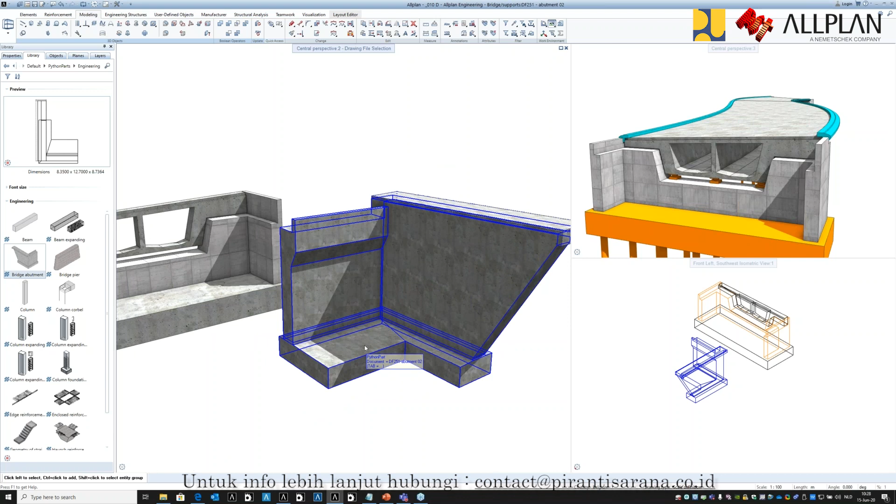So I just double click it. For example, we have the angle between these two, between the wing wall and the main support for the deck. This angle can be changed, for example. So we have the wing wall here.

Should be now 60 degrees, for example. Then you can see, you can just put a value here, or it can be a handle, and then this object will now be different. If you need to do this with modeling, then you need to slice, you need to cut, you need to change some parts.

So this is very user-friendly and quick. And it can be, with the PythonParts, you can make sure that it follows some rules or parameters or things that you have set that make sure that the object is not out of specification.

So here, let's say, you can take this one here, and then you can make it also wider, and then you can see what happens with the bottom element. So everything is linked. You can make this a little bit lower. You can make this also wider. Yes, so you can quickly adapt it with parameters.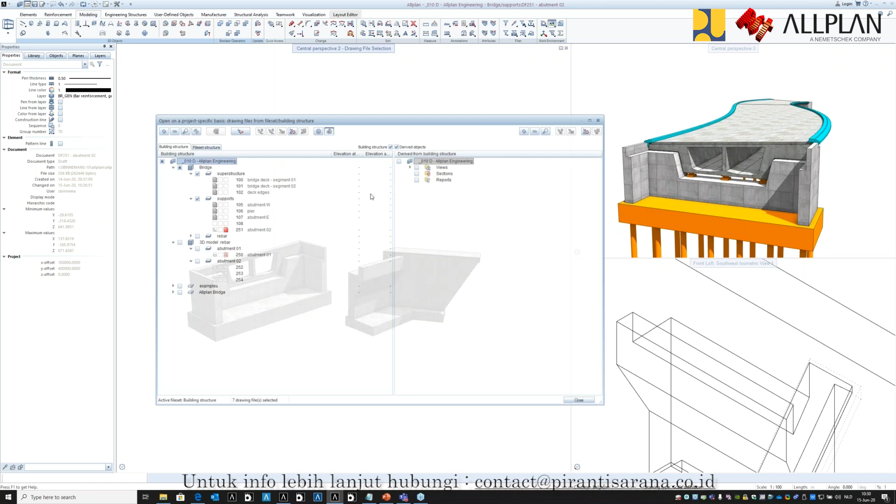So this is then the advantage of a Python part, where you can change parametrically and still be able to modify it later. Okay, then maybe the last part right now, and I will go into some reinforcement. So I will open just this one file that I have here. Maybe we don't need to have the parametrical element anymore.

Okay, so now I'll go here to a plan view, wireframe. So this is the top view for the 3D model, and I will create some section or visualization from this element, similar to what we've shown before with the pier, but now go step by step also with the views and sections, and then generate a couple of rebar.

So views and sections, you can generate a section around the element through part of the element. So let's say I would like to have a front view in this case. I will just put this here. This is a front view.

You can also configure how you would like to see it. So can be, would you like to see bitmaps, for example? I will just place it here and then modify them afterwards. So this is one view, and I will create another one with the same

boundary of the section, but now a free view. So it will be an isometrical view, and I would like to take over this view here. So I click on the right to take over this view, and then I will get this representation. So again, how you would like to see these elements with the bounding box, with the colors, these are things

you can configure. So let's modify both of them here. I would like to modify both of them. I don't want to see a clipping path, for example, and I would like to see them with some textures. So that means the same textures that we use here. And I would like to see shadows, maybe. Not sure if you'll see anything.

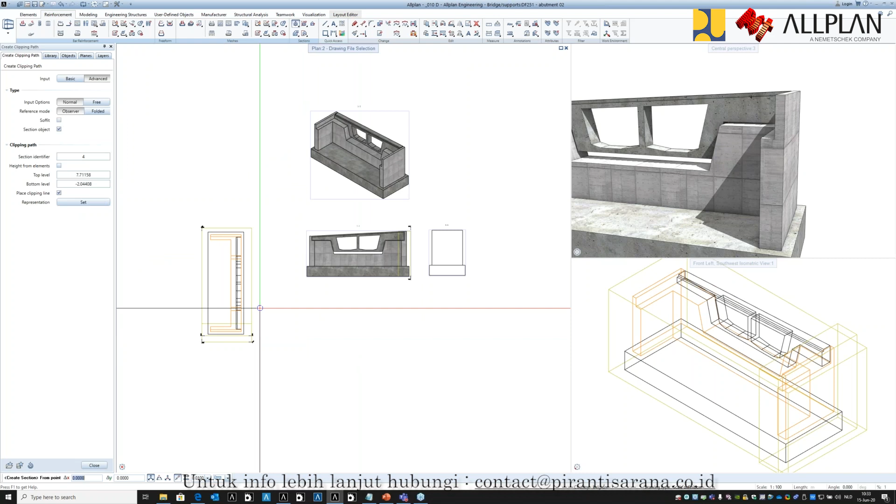And now I would like to create a section again from this one, or from the model also. So you can choose wherever you want to create your section from. So let's say I will create a section here that shows this part. And I look from this side. And now for this section, for this section, so height from the elements, like this.

Okay, so again, nothing from this setting. These can also be a favorite where you configure it how you'd like it to look. You can also set if you want to see clipping lines, hidden edges, or a filling when you cut something - different elements or parameters, line thickness, line colors, things like that. So here you see the object is now just a black line and filling for the section, so you can see its section.

And now I would like to maybe turn on this one here, some hidden lines formats. So you can do this whenever you create a section or modify it afterwards. So here I can see now this hidden lines.

So I would like to place reinforcement here and reinforcement in just this top part. Very simple, just to show the workflow. So create views and sections. And then here I will create - you can see there are multiple bar shapes that you have. You can set here also, choose from the schematic.

A bar shape is defined by a steel catalog, cross-section catalog. So depending on the cross-section catalog, you can have different diameters, and depending on the standard that you have, the calculation will be different. So here you can choose different kinds of standard - ACI, British standard, Euro norm - and also concrete cover are linked to the standard.

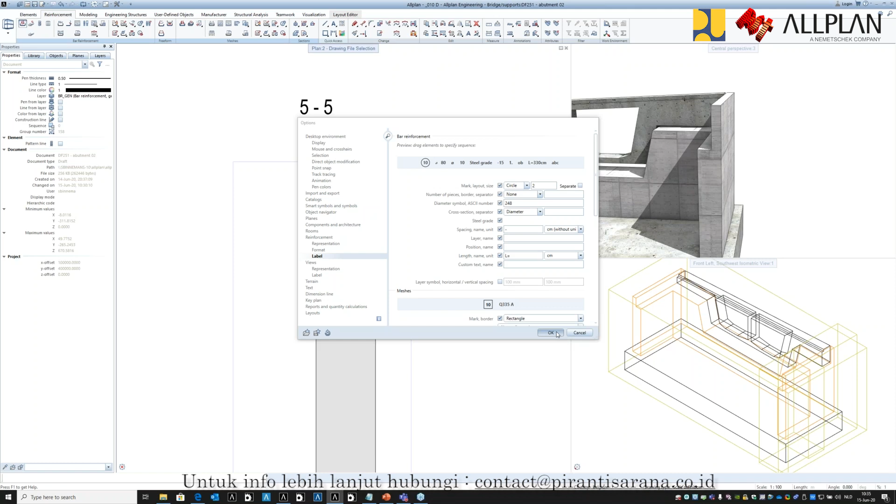Next to that, we have a cross-section catalog. The cross-section catalog is something that you can also define or download, and there are, depending on the country standard you have... I'm working with the Belgian country standard, so I have the Belgian cross-section catalog for my rebar, with different diameters and different steel grades. You can also modify one where you say, I would like to have different diameters with different settings. So this is all taken into account when you create reinforcement.

So here I will generate reinforcement, just a free form, and just click some points. So I click points in the 2D section, taking over the edges. Diameter 25 doesn't matter here, it's quite thick, but okay. And let's say here, the two segments should have the same length - both should be 2.5, for example, and this should also be 2.5.

Bar shape is generated or created, and now you can see the placement is done automatically if it's the full length, or I can say I don't want it to be the full length - I would like it to be just from this point to this point. Then you can see that you can control by yourself where this rebar should be generated. Or I would like to define it again from this point to this point.

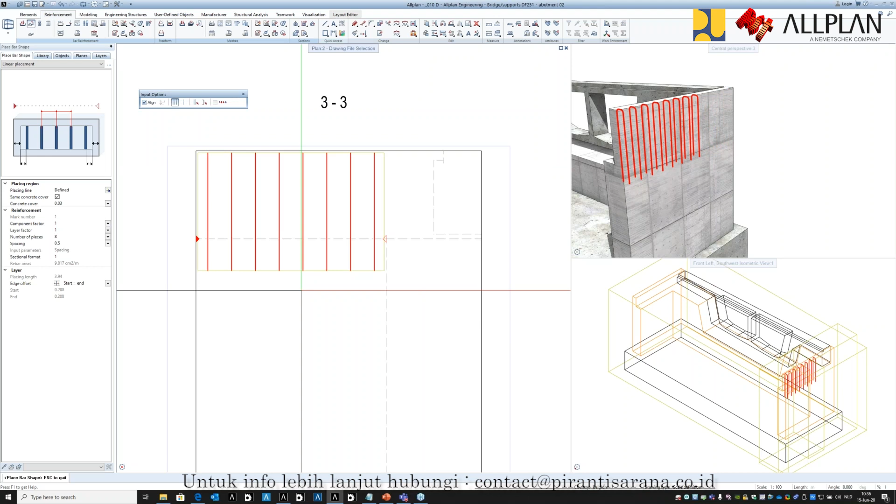And you can set spacing should be different, maybe 0.2, for example. Things can be set, or you want to have a number of pieces. So this is, let's say, the first bar.

Now, for the next bar, I would just use a straight placement. You can create it with free form or here and just make it react to some of these lines. So, okay, 25 doesn't matter also. For the placement now, I will place it against an existing bar. So instead of defining the position myself, I will say, okay, place it against this edge with a spacing, so you can see it will be generated along this edge.

I can say it should have a spacing, or just have a number of bars. So I can say, okay, just put 3 bars there, or I would like to have a spacing of 0.2 also in this case, or 0.5, for example. You can modify it, and you can also modify it later, like we have seen before.

And then we have the rebar in 2 different views, also in the 3D model. So let's turn this transparent maybe a little bit, so that we can see the rebar here. So rebar in the 3D model. And now I will do some representation.

For this one, I would like to see just the middle bar, and for the horizontal bars also the middle bar. Then I can add some labels to it, maybe with dimension lines. This configuration comes from the options - you can set the spacing or define how it should look. I'll use a dimension line with dimension line options, placed from here to there, with the label wherever you want. You can show bar markers so you can see what bar it links to. We have here these 5 bars, diameter 25 every 50 centimeters. This can all be configured - millimeters, meters, whatever you need.

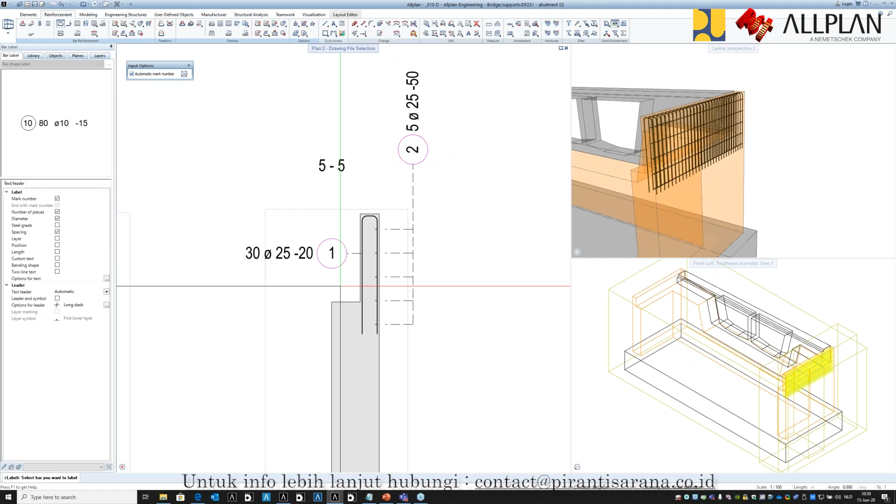If you go back to my object palette, we can also see this here - we have bar reinforcement, our different bar marks. Wherever I select them here, you will see them in all views and sections. Same here, if I select this bar, you can still modify it - for example with direct inputs, changing the values, the length, or the distance in between.

As a last thing, I can put a schedule next to it - just a very simple legend. Then we get the overview of these bars, taken again from the model. If I modify one, let's say I change the placement of this open stirrup to every 30 centimeters instead of 20, you see the label changing here, and also what is changed in the schedule. So you don't need to manually recalculate or check your drawings - everything comes from the reference 3D model, quantities and all labels come from this 3D model.

I think this is everything I wanted to show. We've gone over some reference projects, civil engineering, some bridges, mainly based on these case studies that you can find on our website. You can download the package with all of these case studies, giving you behind the scenes of the project - how they're actually designed in Allplan, what you can do with this 3D model rebar, and then some hands-on, some introduction into 3D modeling and rebar detailing.

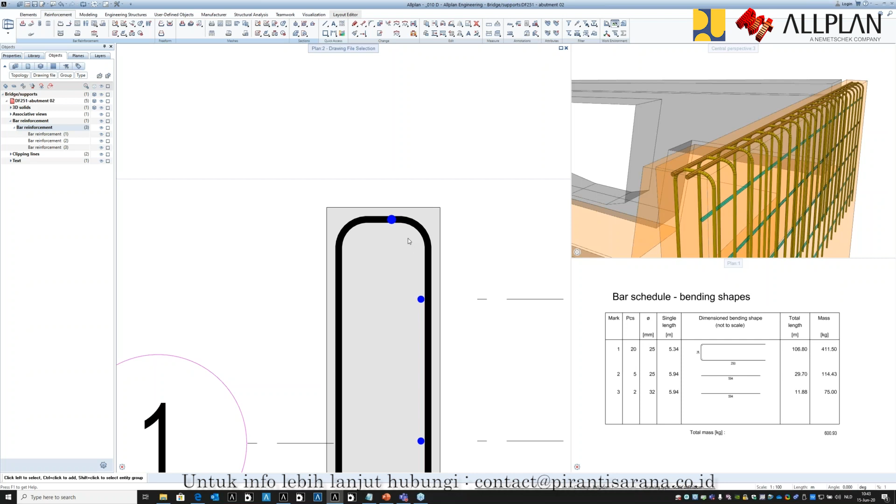So if I do the clash checking, and now I need to check where this clash checking is. Collision check. You can select in your 3D model, for example, or a whole thing, so it depends on how many elements there are. And now you can see there are 40 collisions created.

So for the collisions, you will see them highlighted with red crosses in your 2D design, and also in the 3D model you will see them with these boxes. So there is clash check between 3D rebar elements, and you can also save this clash check on a different drawing file to check later.

This is only hard clash, so there is clash between 3D objects, there is clash between rebar objects, but there is no clash between rebar and 3D elements because rebar is mostly inside of 3D objects. But there is also a clash between fixtures - let's say anchor head could be a fixture or an insert in the concrete, and rebar can also be checked. But it's a hard clash, so there is a clash or there is no clash.

In BIM Plus, we can have different kinds of clashes - you can have a clash where you have a tolerance, or clashes where you set between different types of element. So in Allplan, it's a very basic clash, just to see if you create something would be okay. Then it's up to you to define how it should be, but it's mainly for reinforcement and 3D objects. BIM Plus can do more things.

Okay, that's it for my answer.

Yeah, okay. Do you want me to show my screen? I don't know how to show my screen. Let me see my screen. Can you see my screen? No, I'm still presenter I think. Oh, so should I stop then? I will stop.

Before you stop, can you show me the normalization, like rebar normalization standardization? What do you mean exactly by that? ACI, like bending radius and something like that. Where does this come from? And also the 12 meter length - when you create something longer than 12 meters, it will be spliced automatically. I think you need to show that.

Yes, okay, so I will share my screen again then. Share. So wait, now I have to activate. Can you see my screen or not? Not yet. Yes, yes, okay.

Yes, so about the rebar setting. I went briefly over it in the options. So in the reinforcement you have these standards that you can choose from. I will show later where they are configured, and also choose what bar length you will use. So these are some main settings that you can do. And these actual standards, this is also open, so you can create your own standard and add it to the list of standards. So it can be a project standard or a customer standard.

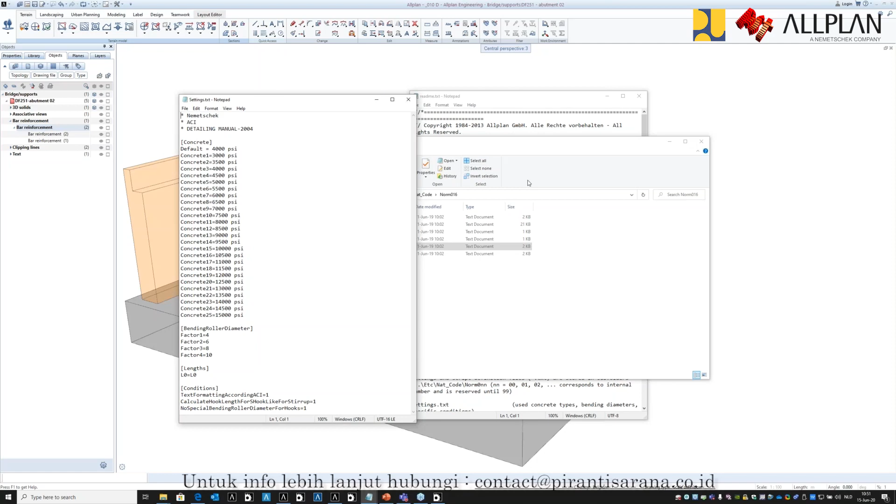So if you take a look at Eurocode - is this here? Oh no, this is the wrong one, national code. So again we have the Euro norm, which is 19. So we can check here 19, and then about the hook length or the offset or bending roller diameter, for example, you can see if the diameter is larger than 16, the bending pin should be 7, if it's smaller than 16, it should be 4.

And these things we can see also when we create rebar, then these values will be used. So if I take the Euro norm, for example, and I choose Rebar Engineering, let's take closed stirrup for example, you see this is now the bending pin factor 4. If I choose something bigger than 16, you will see the bending pin will now be 7. Same thing with the hook length - hook length is now 29 centimeters. If I take another diameter, the hook length will be different. So this is all calculated from the standards.

That answers the question?

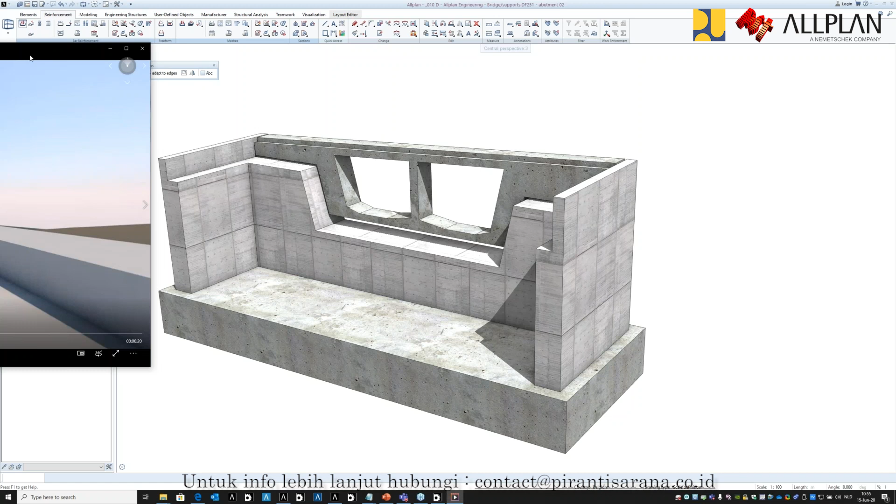For civil engineering, the freeform modeler is also included in those versions, but it's not necessary to have the architectural modules. A civil engineer needs the terrain modeler and dedicated modules for civil engineering. You can add them as an option to Allplan Architecture and Allplan Engineering for building, but they're automatically included in the civil version. So Allplan is one and the same package with dedicated modules for each discipline. Allplan Bridge, however, which will be covered tomorrow, is a parametric bridge designer, a separate tool on top of Allplan Engineering. Together with Allplan Engineering Civil, Allplan Bridge builds the Allplan Bridge solution, which we'll demonstrate in detail tomorrow. Does that answer the question?

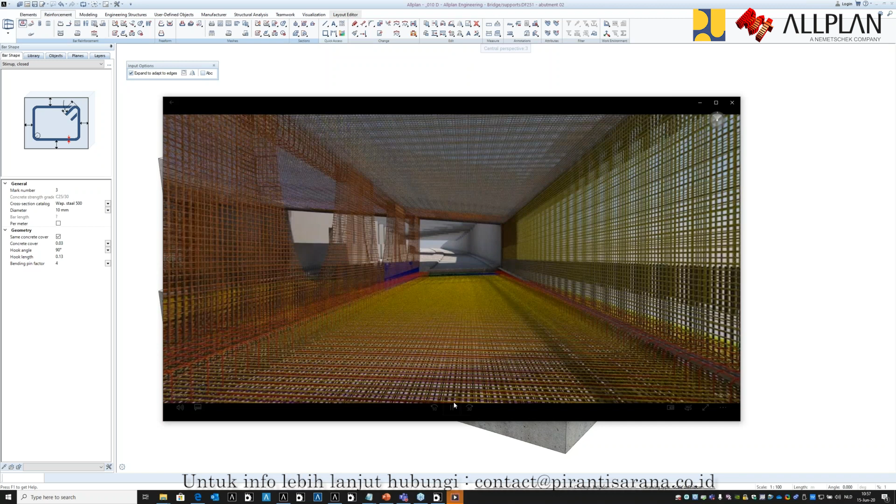Remember that aqueduct? There is a movie clip generated from this project, and you can say, I'd like to look around at this point where there is reinforcement. With a movie clip you can give someone information and they can experience and check something in detail. This could be a handy format for presentation, or just to look around while playing and check, for example in a tunnel, looking up. I'm not sure how well it plays through GoToMeeting, but you can always pause it and look around at any position. This is quite interesting, I'd say.

Okay, that's it. Thank you.